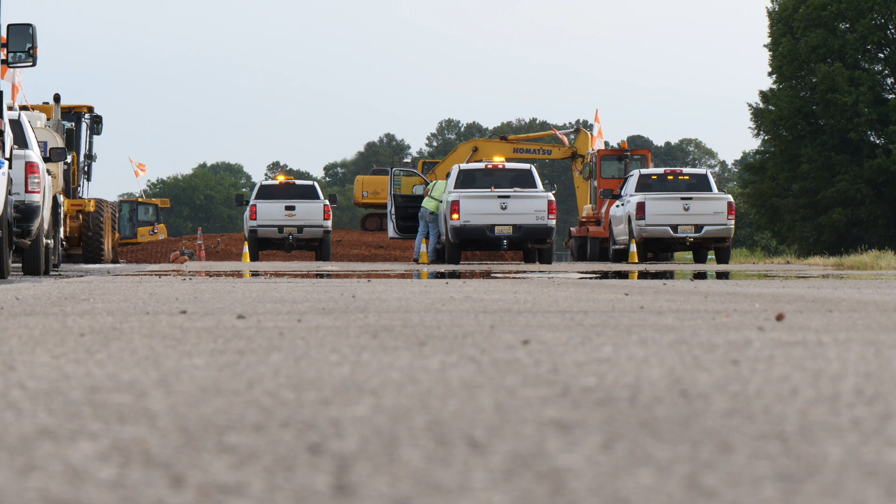Wiregrass Construction Company strives to create a culture of safety in everything we do. To accomplish this, we have established the policies in this manual. This presentation is for general safety information at Wiregrass Construction Company, giving all of our team members a reference to

items we feel are important to everyone. By no means is this an all-encompassing list of every safety practice, but it is a compilation of topics that we encounter regularly in the construction business. For specific instructions or more detailed information, please refer to your manual.

Every employee has a duty to one another to be on the lookout for unsafe work habits, conditions or equipment. Failure to address an apparent unsafe condition could lead to injury to one or more members of the team. If you see a better or safer way to do a task, it is incumbent on you to pass this suggestion on to your supervisor.

Safety must be achieved at a personal level. It is a condition of your employment that you work safely. We made you a member of our team because we value your contribution to our company. We need every team member healthy and operating at 100% to compete and succeed in our industry. Beyond that, we want all of our workers to return home to their families every day in the same condition as when they left in the morning.

Wiregrass Construction Company has a zero accidents philosophy and is committed to ensuring safe and efficient work execution, protection of our environment, as well as the safety and welfare of our employees, the public and the communities we work in.

No employee should undertake a job that appears to be unsafe. No employee should use chemicals without fully understanding their toxic properties and without the knowledge required to work with them safely. Mechanical safeguards must always be put in place and be kept in place.

Personal protective equipment must be used when and where required, and be properly maintained. Employees are to report to a superior or designated individual all unsafe conditions encountered during work. Any work-related incidents, injuries or illnesses, however slight, must be reported to an immediate supervisor at once.

Keep your mind on your work at all times. Horseplay is not permitted on the job. The result may be injury, termination or both. Do not distract fellow workers. Do not engage in any act that endangers another employee.

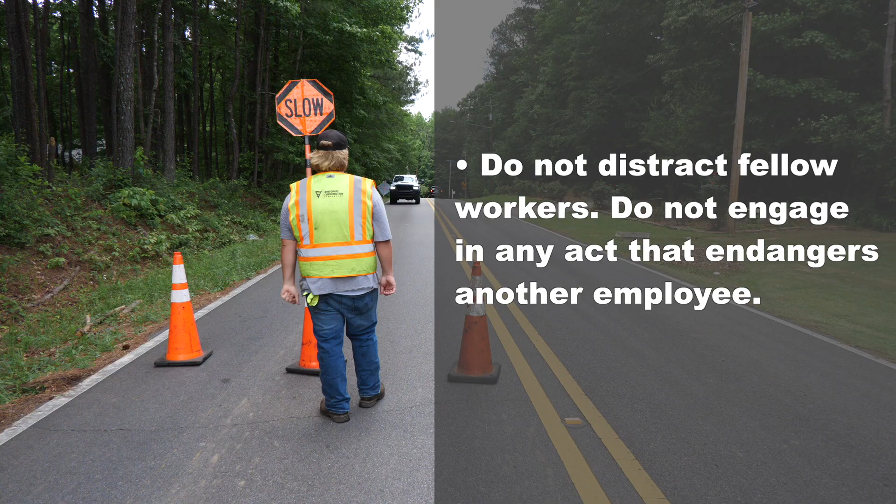Avoid leaving an unattended machine running unless it is fully guarded and intended to operate continuously in a safe mode. Riding on any material handling equipment not equipped with a seat and seatbelt for each rider is prohibited and is grounds for disciplinary action. When working around equipment, make sure the operator is aware of your position.

Do not enter any barricaded area unless you are authorized to do so. Help keep the job site clean and orderly. Use the right tools and equipment for the job. Lift correctly with your legs, not your back. Get help if the load is too heavy.

A job safety analysis is the systematic identification of potential hazards in the workplace that can be used to identify, analyze, and record: first, the steps involved in performing a specific job; next, the existing or potential safety and health hazards associated with each step; lastly, the recommended actions and procedures that will eliminate or reduce these hazards and the risk of a workplace injury or illness.

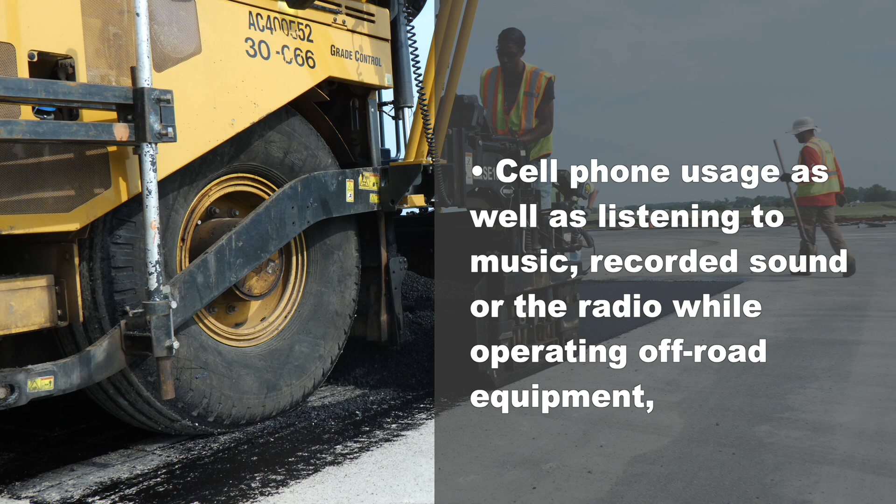Cell phone usage as well as listening to music, recorded sound or the radio while operating off-road equipment, operating licensed vehicles for construction purposes on job sites or working on a job site is prohibited.

Safety policies and work rules are developed for everyone's protection. Knowing these policies and rules is a condition of employment, as is compliance with them. Failure to do so may result in disciplinary action, up to and including termination.

Stop work policy. As a Wiregrass Construction Company representative, you have the responsibility and authority, without the fear of reprimand or retaliation, to immediately stop, question and help rectify any work activity that presents an unaddressed hazard to you, your coworkers, our clients, the public or the environment.

If you do not feel the unaddressed hazard is resolved adequately, you have the responsibility to raise it to a higher level. Minor first aid treatment.

Each employee needs to inform his or her supervisor of any incident. For minor injuries, participate in treatment with first aid supplies. If a first aid kit is used, each use should be indicated on the incident investigation report. Understand that access to a first aid kit is not intended to be a substitute for medical attention.

Only those employees who are currently certified in basic first aid from a nationally recognized provider shall administer first aid.

First aid kits. Every supervisor will be assigned a first aid kit that must be readily available at the worksite. The supervisor will be responsible for ensuring that supplies are within date and readily available.

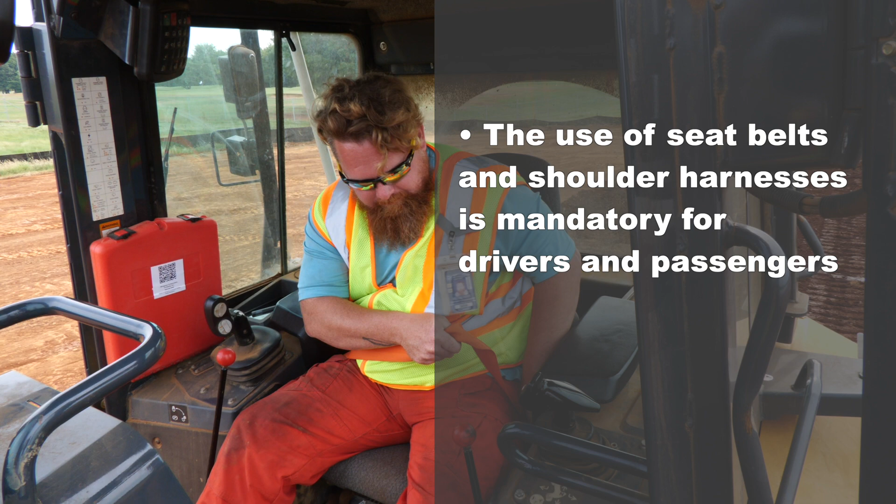The use of seat belts and shoulder harnesses is mandatory for drivers and passengers. Adhering to the manufacturer's recommendations regarding service, maintenance and inspection. Vehicles shall not be operated with any defects that would prevent safe operation.

Attention to and practice of safe driving techniques and adherence to current safety requirements. Whenever conditions permit, a vehicle should be backed into a parking space. Many accidents occur when backing out of a parking space. Restricting the use of vehicles to authorized drivers only.

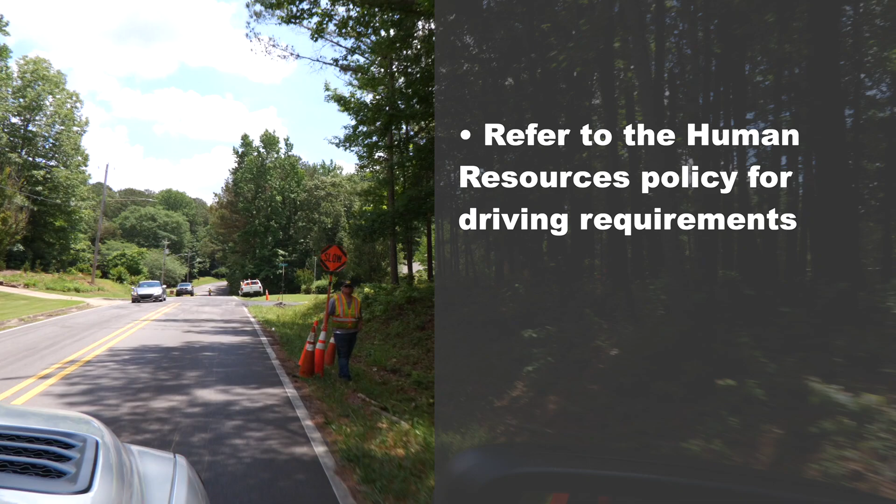Reporting the occurrence of moving violations. Accurate, comprehensive and timely reporting of all accidents by an authorized driver. Reporting theft of any company vehicle to law enforcement and your supervisor immediately. Refer to the Human Resources Policy for driving requirements. Maintain a proper level of housekeeping in and out of all vehicles.

Heat stress prevention and control. Whenever it is determined that a heat stress environment exists, heat stress preventative measures shall be implemented. Refer to heat application on your smartphone or tablet for current conditions, precautions, and for first aid and instructions.

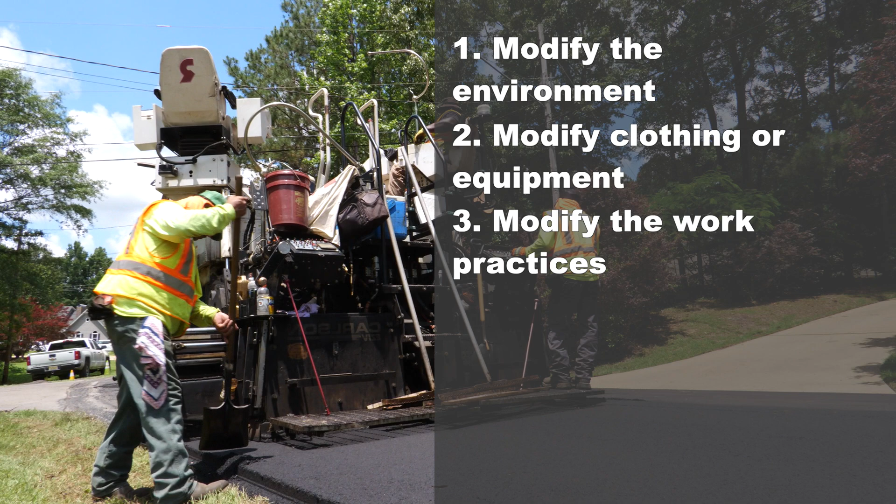When unacceptable levels of heat stress can potentially occur, there are generally five approaches to a solution: modify the environment, modify clothing or equipment, modify the work practices, modify the worker through heat acclimation, and modify production with a work-rest regimen.

Housekeeping. Recommended practice: 20-20-20. Every 20 minutes, take a 20-second scan of a 20-foot work perimeter. The work crew shall clean and organize the site and work areas regularly, not just at the end of a shift. The housekeeping program shall identify and assign responsibilities for the following.

Cleanup during a shift, day-to-day cleanup, waste disposal, removal of unused materials, and inspection to ensure cleanup is complete. Poor floor conditions are a leading cause of accidents. Clean up spilled oil and other liquids immediately. Work areas, passageways, stairways and other areas shall be kept free of debris and any unused materials.

Aisles and stairways: areas within 3 feet of the bottom and top of all ladders, stairways and other access points are to be free of any materials, equipment, cords and hoses. There shall be unobstructed access at all times to such areas as electrical panels, safety disconnect switches, fire extinguishers, emergency exits, etc.

Tools and equipment. The orderly arrangement of operations, tools, equipment and supplies is an important part of a good housekeeping program. Whether in a tool room, on the rack, in the yard or on the bench, tool housekeeping must be maintained. The site shall mark locations to provide the arrangement of tools, both in the tool room and near the workbench, to provide them with suitable fixtures.

Return tools promptly after use to reduce the chance of misplacing or losing any items. Workers shall regularly inspect, clean and repair all tools. Damaged tools shall be tagged and taken out of service immediately.

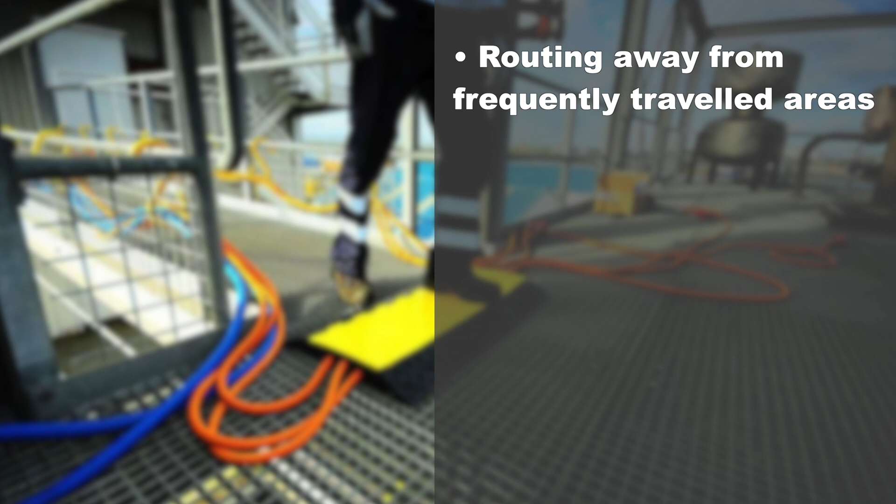Special care shall be taken in the placement of hoses, cords, welding leads and electrical and other cables. They shall be placed in a manner that will reduce the chances of being damaged by personnel, activities or equipment and to eliminate potential tripping hazards to personnel. Acceptable methods for preventing damage or eliminating tripping hazards include routing away from frequently traveled areas, burying in a trench and covering when placed in frequently traveled areas, or placing in an elevated position.

Storage. Ineffective or insufficient storage planning results in materials being handled and stored in hazardous ways. Ensure work areas are not used as storage areas by having workers move materials from work areas, as needed. Investing in extra bins and more frequent disposal may be required. The organization of stored material is essential for overcoming material storage problems, whether on a temporary or permanent basis.

Fewer strain injuries may result if the amount of handling is reduced, especially if less manual material handling is required. The location of the material shall not interfere with work, but materials should still be readily available when required.

Stack cartons and drums on a firm foundation and cross-tie them where necessary to reduce the chance of movement. Stored materials shall not obstruct aisles, stairs, exits, fire equipment, emergency eyewash fountains, emergency showers, or first aid stations. All storage areas should be clearly marked.

Flammable, combustible, toxic, and other hazardous materials shall be stored in approved containers in designated areas that are appropriate for the particular hazards they pose. Lay-down areas and yards shall be kept clean and organized. Materials shall be neatly stacked or placed. The materials shall be stacked in a secured manner to prevent toppling or spillage. Risk of impalement.

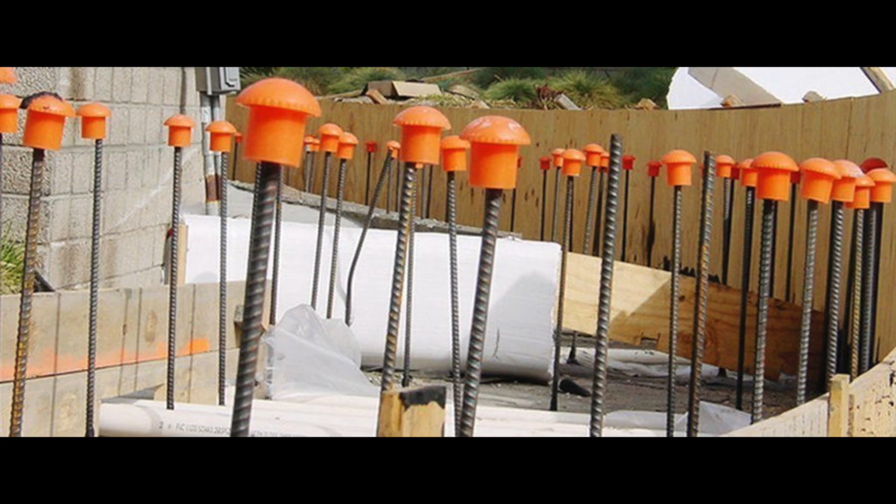Do not use the mushroom caps shown. Only rebar caps designed to provide impalement protection, such as those containing steel reinforcement, shall be used. Note: this does not eliminate the need to protect the ends of recognized vertical or horizontal impalement hazards.

Shop spill control. The best way to control spills is to stop them before they happen. Regularly clean and maintain machines and equipment in accordance with manufacturer requirements.

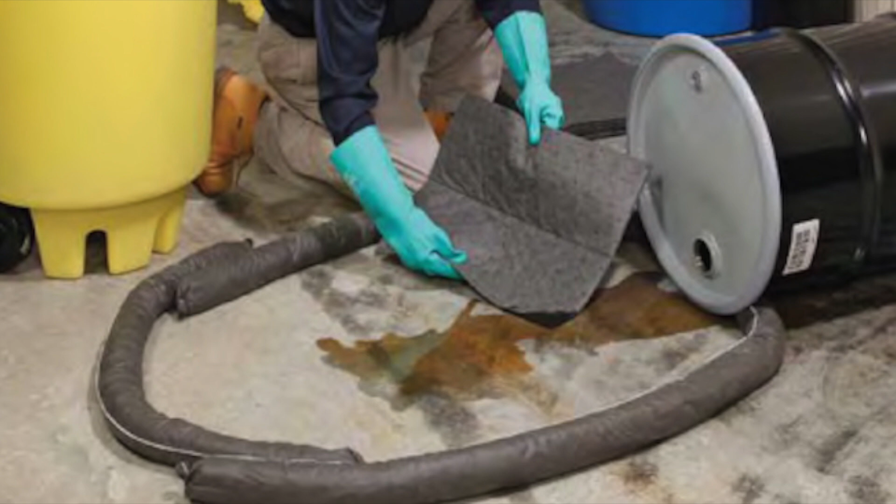Use drip pans, secondary containment, and guards where possible spills or leaks may occur. Promptly fix equipment or machines that develop a leak. Should spills or leaks occur, clean them up immediately and report the incident.

Absorbent materials are useful for wiping up greasy, oily, or other liquid spills. However, used absorbents must be disposed of in closed containers segregated from others, properly labeled, and removed from the common trash areas. Compressed air above 30 psi shall not be used for removing dust, dirt, or chips from equipment work surfaces. If compressed air is utilized, the proper PPE shall be worn.

Container labeling. Supervisors will be responsible for all containers of hazardous chemicals entering the workplace and will assure the chemical containers are properly labeled with the following: chemical name, hazard warning, name and address of the manufacturer, importer, or responsible party.

The facility where chemicals are purchased is responsible for obtaining the SDS. Current master inventory list of all SDS. The identity used on the SDS shall be the same as used on the container label.

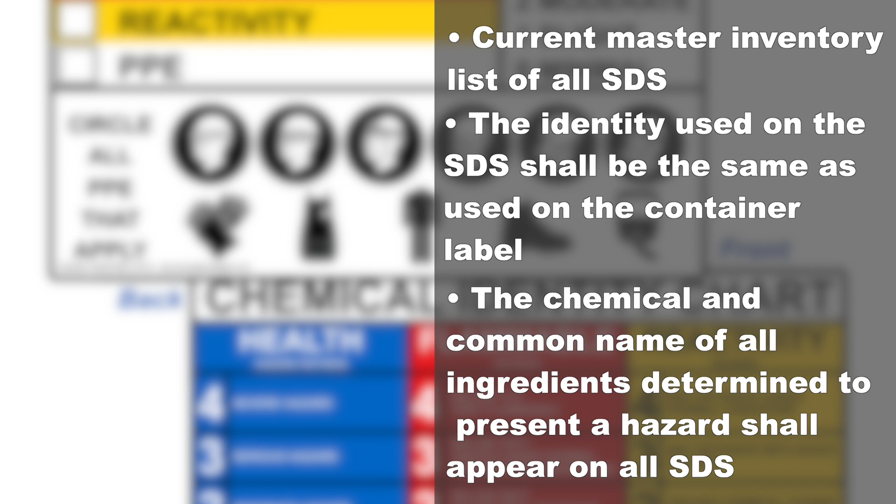The chemical and common name of all ingredients determined to present a hazard shall appear on all SDS. The physical and chemical characteristics of the substance, including vapor pressure, flash point, etc. The fire, explosion, and reactivity hazards of the chemical mixture, including the boiling point, flash point, and auto ignition temperature.

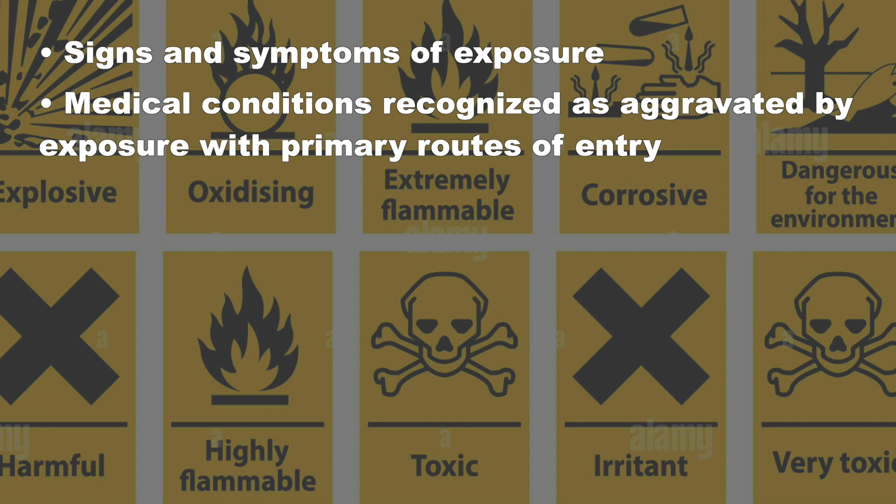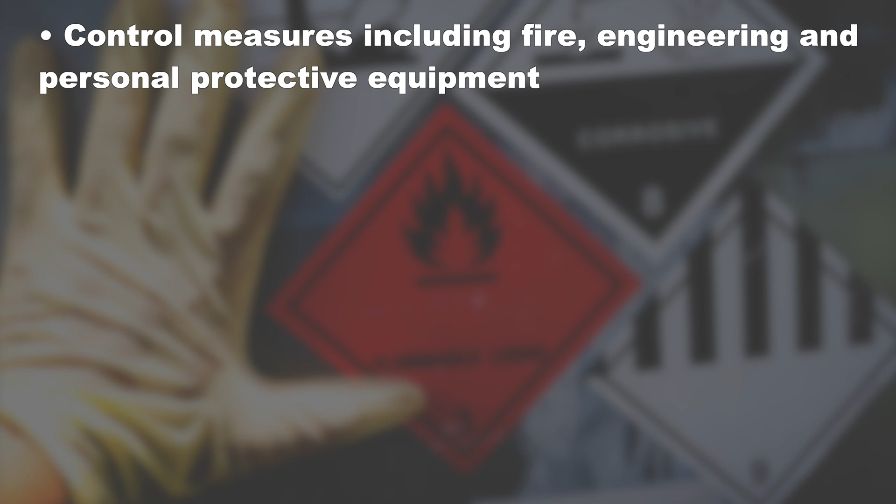Health hazards of the chemical mixture, including signs and symptoms of exposure, medical conditions recognized as aggravated by exposure with primary routes of entry, permissible exposure limit (PEL) or any other exposure limit used or recommended by the manufacturer, importer, or employer. Whether or not a substance has a carcinogen listing, NTP, or has been found to be a potential carcinogen, IARC, by OSHA. Control measures including fire, engineering, and personal protective equipment.

General precautions for safe handling and use, including protective measures during repair and maintenance procedures for cleanup of spills and leaks. Emergency and first aid procedures. Date prepared or changed. Name, address and telephone numbers of the manufacturer, importer or responsible party to call in an emergency.

Before starting work, the supervisor of a new employee will go over their copy of the Hazard Communication Program, HCP, and each SDS applicable to the job via the WCC QR code to the e-binder.

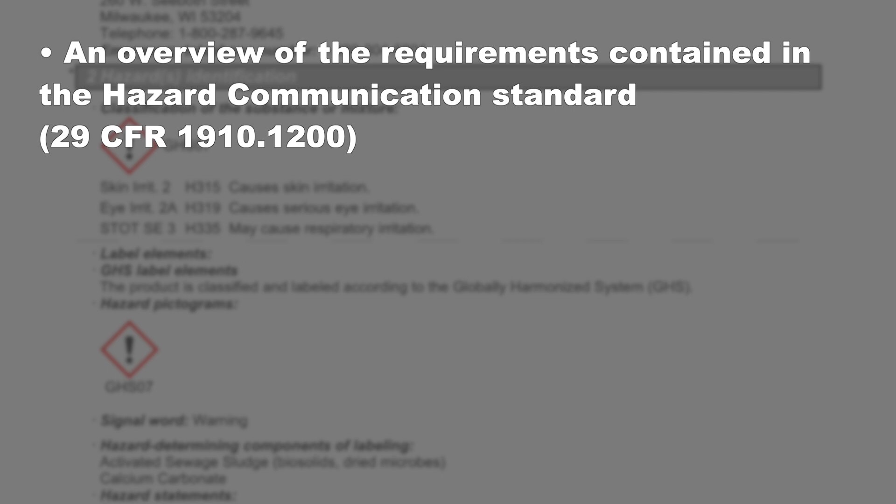The minimum orientation and training for a new employee is as follows. An overview of the requirements contained in the Hazard Communication Standard, 29 CFR 1910.1200. Chemicals present in his or her workplace. Location and availability of the written HCP. Physical and health effects of the hazardous chemicals in the workplace.

Methods and observation techniques used to determine the presence or release of hazardous chemicals in the work area. How to lessen or prevent exposure to these hazardous chemicals through proper control or work practices and PPE. Steps taken by the applicable division to lessen or prevent exposure to the chemicals listed on the inventory list. Emergency procedures to follow if exposed to any chemicals. Location of SDS file and hazardous inventory list, SDS index, or QR code.

Before any non-routine task is performed, employees shall be advised and/or they must contact the supervisor for special precautions to follow. The supervisor shall inform any other personnel who could be exposed.

Personal protective equipment, or PPE, is not to be relied upon as the only means for providing protection against hazards, but is to be used in conjunction with guards, engineering controls and sound construction practices. If possible, hazards will be abated first through engineering controls, with PPE to provide protection against hazards which cannot otherwise be reasonably abated. The supervisor will provide training for each employee who is required to use PPE.

Training will include the following: when PPE is necessary, what PPE is necessary, how to wear the assigned PPE, limitations of PPE, and the proper care, maintenance, useful life and disposal of assigned PPE.

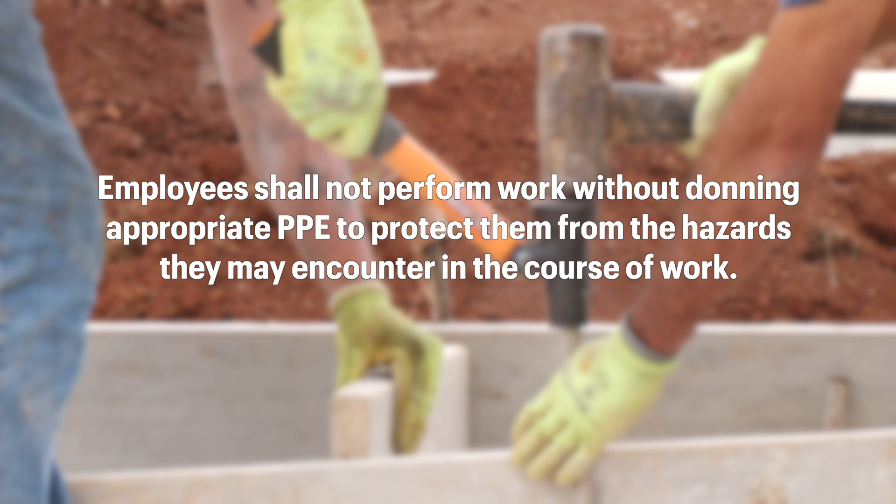Employees shall not perform work without donning appropriate PPE to protect them from the hazards they may encounter in the course of work. Shirts with minimum 4 inch sleeves and long pants are required. No tank tops, sweatpants or shorts are allowed. Loose-fitting clothes and jewelry shall not be worn around rotating machinery or operations.

Hair will be maintained beneath a hard hat or protected in a manner to avoid being caught in any equipment or operation. Hard hats: all employees working at or visiting a project must wear a hard hat at all times when required by owner, client, general contractor or company. Hard hats will also be worn in work environments where there are impact hazards from falling or flying objects, milling operations, whenever working in or around the swing radius of an excavator, or any overhead load or hazards of electrical shock.

Company-furnished hard hats shall be taken care of and properly worn without modifications, for instance painted, holes drilled in them, placement of excessive stickers, etc., and returned at the end of your employment. Supervisors and managers are responsible for ensuring that their employees are in compliance with this policy. Failure to do so can result in disciplinary action up to and including termination.

Eye and face protection: eye protection will be worn when required by the owner, client or general contractor and within any area where work is being performed that may result in flying debris, milling operations, dust, etc. Furthermore, additional welding hoods, chemical goggles, face shields, etc. shall be required.

Hearing protection. Gloves. Protective footwear. Life jackets. Reflective vest. Personal fall protection equipment.

Use all fall protection equipment for its intended purpose only. Using a lanyard or any other fall protection device for rope or any other application other than its intended use is strictly prohibited. Do not wrap a lanyard around an object and then clip it back to itself, for instance choking the lanyard, unless it is designed to be used in this application by the manufacturer. Otherwise, manufacturer recommendations strictly prohibit this practice.

If there is nothing to clip your lanyard off to, advise your supervisor and you will be issued a tie-off strap or crossarm strap that will assist in developing an approved tie-off connection point. Clipping two lanyards together, hook to hook, is prohibited. The hooks were not designed for this use and using the lanyards in this manner is forbidden.

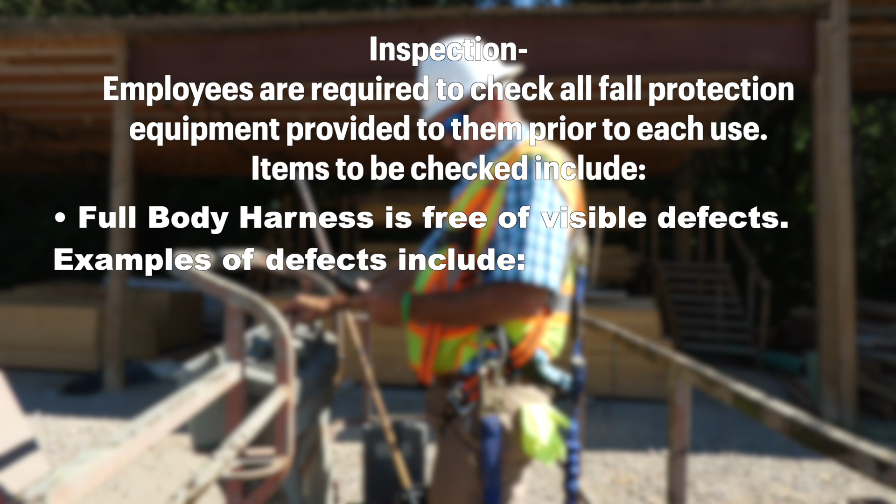Inspection: employees are required to check all fall protection equipment provided to them prior to each use. Items to be checked include: full body harness is free of visible defects. Examples of defects include significant burns to the webbing material, cracks, burns or bends in any of the metal components, painted metal components, bent buckles or tongue rivets on the belt and or leg straps.

Harness has manufacturer identification label attached and it is legible. Lanyard double locking snap hooks are operating properly and freely. Shock absorbing components have no burns, cuts or excessive fraying. Anchorage points are capable of supporting 5,000 pounds.

If your personal fall protection harness and or equipment has any of these defects, or if it does not properly fit you, discontinue the use of it immediately and notify your supervisor or safety representative. The necessary corrective actions will be taken.

Care: store equipment separately, in a cool and dry place, not subjected to direct sunlight and away from tools and sharp objects to prevent other damage. Harnesses should be kept off the floors and away from exposure to chemicals that degrade synthetics. Ideally, body harnesses and lanyards should be stored on a hook or hanger.

Repair and replacement: when a harness or other fall protection item becomes worn or damaged, or is suspected to be damaged, and or has been involved in arresting a fall, it shall be taken out of service and immediately returned to the employee's supervisor for replacement.

Cleaning and maintenance: cleaning is particularly important for the eye and face, respiratory and hearing protection equipment, as improper cleaning can impair the effectiveness of these devices.

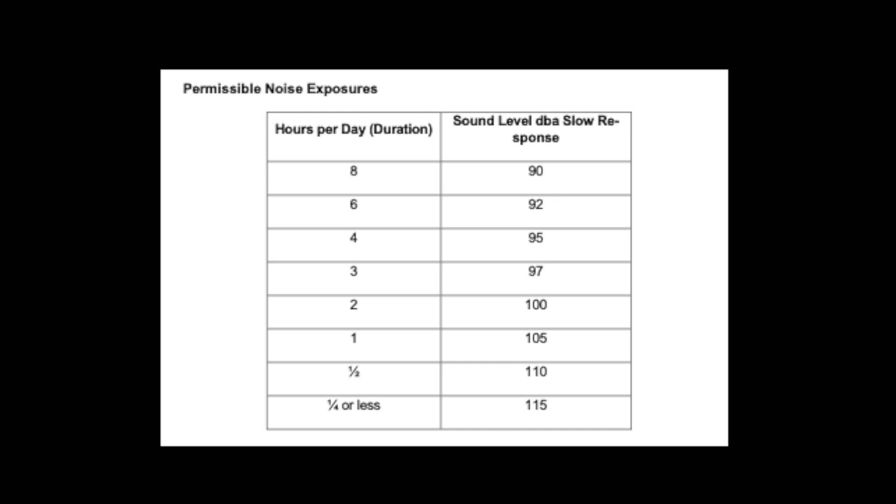Good protection depends on a good seal between the surface of the skin and the surface of the ear protection. A very small leak can destroy the effectiveness of the protection. Hearing protection has a tendency to work loose as a result of talking, chewing, etc., and it must be reseated from time to time during the workday. A good seal often cannot be obtained without some initial discomfort.

There will be no adverse reactions as a result of the use of hearing protection if it is kept reasonably clean. Personal hearing protection will be furnished to employees at no cost. If hearing protection is damaged in any way, contact the safety director for a replacement. The employee is responsible for all PPE issued. Lost or stolen PPE must be replaced by the employee.

Proper manual lifting techniques: never attempt to lift an object that is too heavy for you. Ask for help or use the equipment provided. In the plant or maintenance shop areas, use approved hand trucks, dollies and other equipment to move heavy and or awkward loads. Never try to lift an item or box you cannot comfortably lift. Get help lifting clumsy loads or those too heavy to lift safely.

Make sure you can see over any materials you are carrying. Make sure your path is clear of any obstacles. Do not walk on wet or slippery surfaces. Clean up spills immediately. All employees should know the proper way to manually lift objects.

The potential for back injury is high when manually lifting. No employee should attempt to lift a load that is too heavy. Ask a coworker for assistance or use a device such as a hand truck.

Proper lifting steps: there is a widely recognized correct way to lift. Use the legs when lifting objects, not the back muscles. Keep your back straight. Without the proper technique, a seemingly simple lift may result in injury such as pulled muscles, hernias, or painful back problems or injury. Always follow these 7 basic steps when lifting.

Spread your feet. Place one foot alongside the object to be lifted and the other behind it. Spreading your feet gives you greater stability. Now your rear foot is in position for the upward push needed for the lift.

Keep your back straight. Bend at the hips and knees. Squat into a sit-down position, keeping your back as straight as possible. Straight means your spine, back muscles and body are in proper alignment for lifting safely.

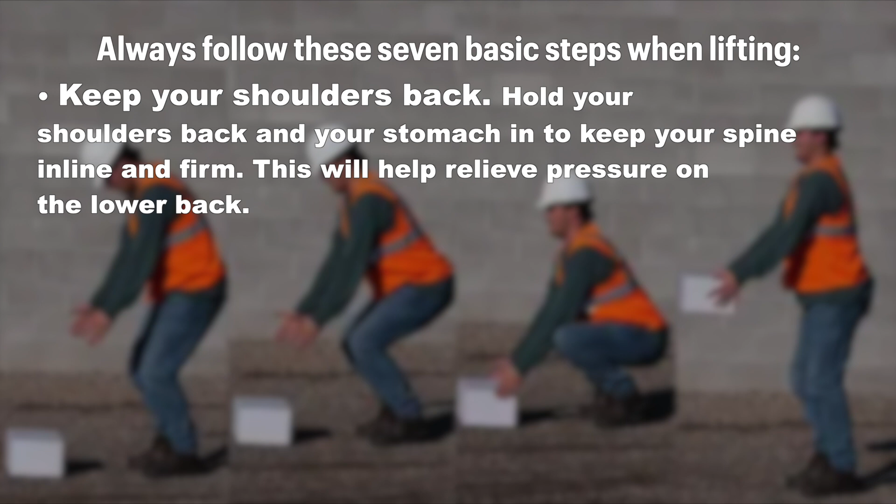Keep your shoulders back. Hold your shoulders back and your stomach in to keep your spine in line and firm. This will help relieve pressure on the lower back.

Be sure you can lift the load. Extend your fingers and hands around the object to be lifted. Use your full palm. Your fingers have very little power on their own, so use the strength of your entire hand for the lift. Tip the load on its side to test its weight and determine if you can carry it comfortably.

Tuck in your arms and elbows. Draw the load in close and tuck your arms and elbows close to the side of your body. Your arms lose much of their strength by holding them away from the body. Holding the load close to the body is the key to safe lifting.

Center your body weight. Position your body so that your weight is centered between your feet. This will ensure better balance and a stable lift.

Begin your lift with a push off your rear foot. Turn your forward foot outward, pointing it in the direction you plan to go. Turn your whole body to avoid twisting during your lift. Twisting is one of the most common causes of back stress.

Putting down the load: keep your back straight, avoid twisting your body. Squat down, bending at the knees. Set down the load and carefully release it.

Additional lifting tips and review: use hand protection, gloves, if necessary. Check the load for rough strapping, sharp edges, splinters and exposed nails. Move your feet to turn your whole body. Do not twist your upper body at the waist. Ask for assistance or use mechanical assistance if the load weight is beyond your capabilities.

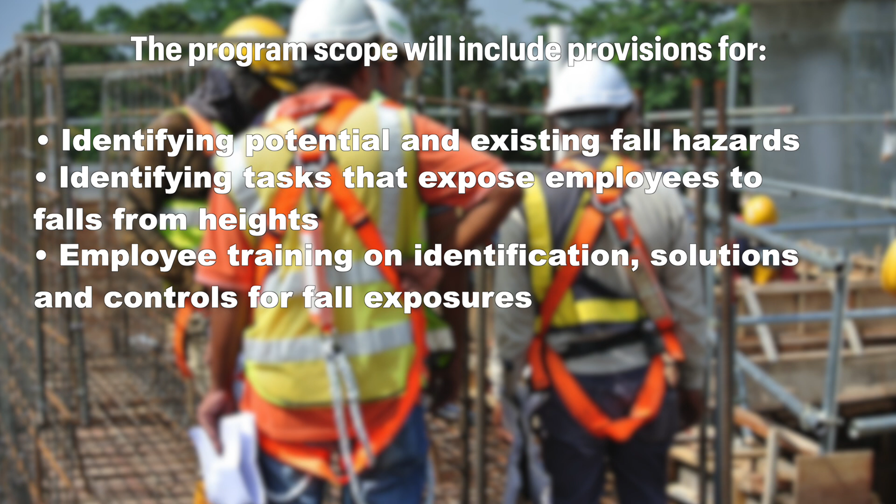The program scope will include provisions for identifying potential and existing fall hazards, identifying tasks that expose employees to falls from heights, employee training on identification, solutions and controls for fall exposures, employee training on the application and use of personal fall arrest systems, understanding what is expected of each employee, and training in record keeping.

It is the policy of Wiregrass Construction Company that all employees working in construction environments will be protected from falls of 4 feet in general industry, or 6 feet in construction, or greater in height, and have the knowledge to identify fall exposures, hazards, and understand applicable controls. All projects will have a hazard assessment completed. No work will be performed until fall risks are controlled.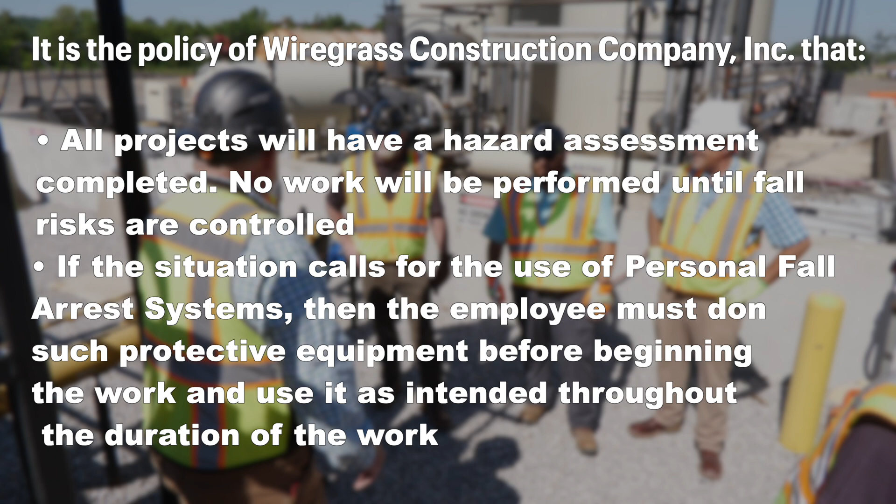If the situation calls for the use of personal fall arrest systems, then the employee must don such protective equipment before beginning the work and use it as intended throughout the duration of the work. Only employees trained in such work are expected to perform it. All places of employment and job sites shall be kept clean and orderly, and in sanitary condition.

Fall protection controls: guardrail systems. Guardrail systems used by Wiregrass Construction Company will meet the following criteria. Top rails and mid rails of guardrail systems must be at least 1/4 inch in nominal diameter. When wire rope is used for top rails, it will be flagged at no more than 6-foot intervals with high visibility materials. Steel and plastic banding will not be used as top rails or mid rails.

Top rails will be between 39 and 45 inches high and able to withstand 200 pounds of pressure in any direction. Mid rails will be above 21 inches high with intermediate openings no greater than 19 inches, with mid rails having a minimum 150 pounds resistance capacity.

Toe boards must be erected along the edges of the overhead working surface for a distance sufficient to protect persons working below. Toe boards shall be capable of withstanding a force of at least 50 pounds applied in any direction at any point along the toe board.

Toe boards shall be a minimum of 3.5 inches tall from their top edge to the level of the working surface, having no more than 1/4 of an inch clearance above the working surface, and be solid or have an opening no larger than 1 inch in size.

Where tools, equipment or materials are piled higher than the top edge of a toe board, paneling or screening must be erected from the working surface or toe board to the top of a guardrail system's top rail or mid rail, for a distance sufficient to protect employees below. If guardrails must be removed to receive materials, alternative fall protections such as personal fall arrest systems will be established.

Hole covers. Hole covers subject to vehicle or equipment traffic must be able to support at least twice the maximum axle load of the largest vehicle to which the cover might be subjected. All other covers must be able to support at least twice the weight of employees, equipment and materials that may be imposed on the cover at any time.

To prevent accidental displacement resulting from wind, equipment, or coworkers' activities, all covers must be secured. All covers shall be color-coded or bear the markings, hole, or cover.

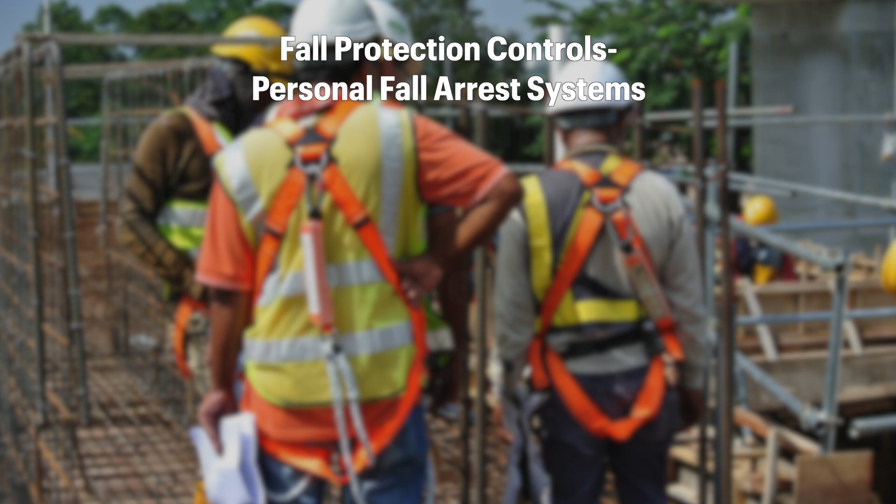Personal fall arrest systems. Where fall risks have been identified and a personal fall arrest system is determined to be necessary, the following criteria will be met. All personal fall arrest system use must be reviewed and approved by a competent person.

Equipment: body belts are not permitted. Only full body harnesses will be used. All components used in a fall arrest system shall be compatible with one another. All components will be inspected prior to each use for wear, damage, or deterioration.

Personal fall arrest systems subjected to impact loading shall be taken out of service immediately and not used again until recertified for use by the manufacturer.

Snap hooks may not be connected as follows unless they are the locking type and are designed for this type of installation: directly to webbing, rope, or wire; to each other; to a D-ring to which another snap hook or other connector is attached; or to any object that is incompatibly shaped or dimensioned in relation to the snap hook, such that unintentional disengagement could occur by the connected object being able to depress the snap hook keeper and release itself.

Anchor points. Personal fall arrest systems shall be attached to anchorage points approved by the site's competent person. The anchor point must be capable of supporting a minimum tensile strength of 5,000 pounds per employee connected. Anyone working at a height must be within verbal range of another person who could raise an alarm should a fall occur.

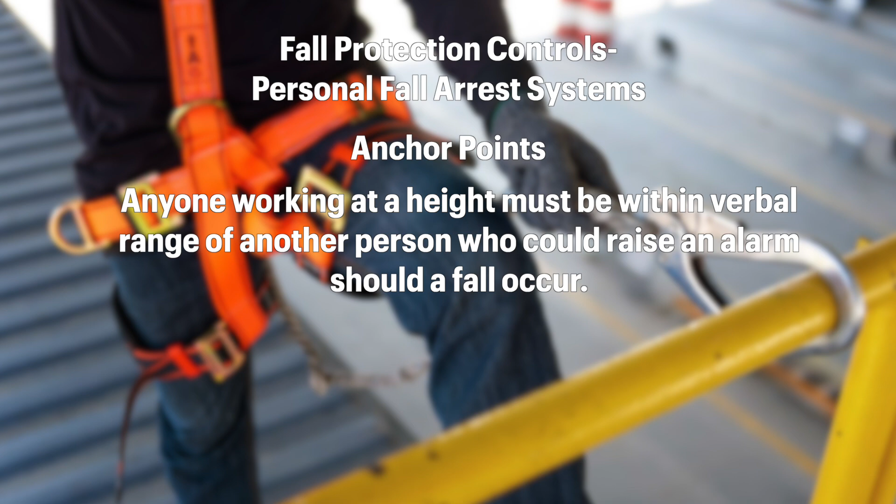Ladders. Ladders purchased shall be vendor certified as ANSI Type IA. Two or more people shall not work from the same ladder unless it is specifically designed for two people. Special pre-task planning should be conducted before employees use a two-person stepladder.

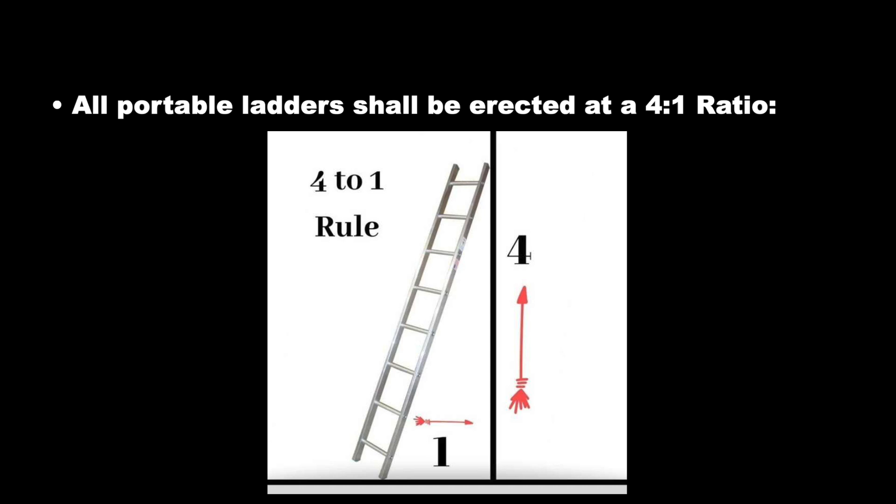A half inch rope shall be spliced to the top, back rung of stepladders, or to the third rung from the top of straight and extension ladders to provide a means for ladder tie-off. All portable ladders shall be erected at a 4:1 ratio. For every 4 feet of extension, the base shall be 1 foot out.

Ladder specifications. Ladders shall be constructed of wood or fiberglass. Straight ladders shall not be longer than 20 feet, extension ladders shall not be longer than 36 feet. All straight and extension ladders shall have non-slip feet. Stepladders and platform ladders shall not be longer than 12 feet as determined by the front rail.

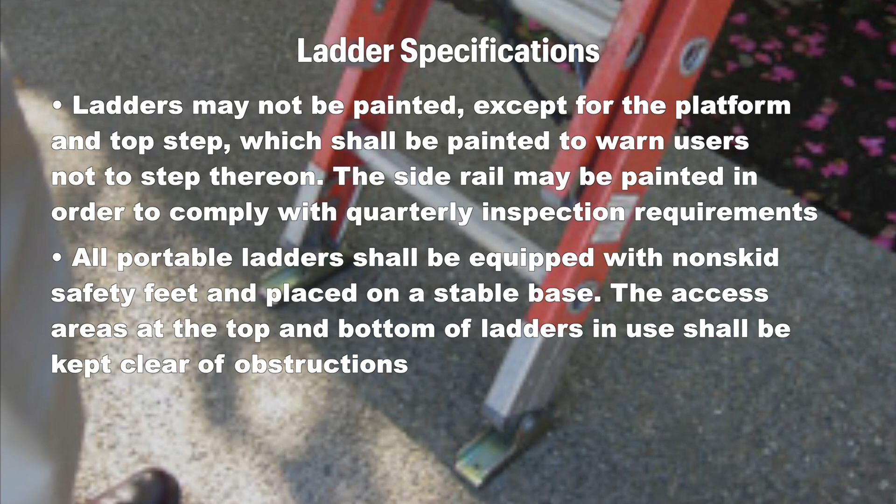Ladders may not be painted, except for the platform and top step, which shall be painted to warn users not to step thereon. The side rail may be painted in order to comply with quarterly inspection requirements. All portable ladders shall be equipped with non-skid safety feet and placed on a stable base. The access areas at the top and bottom of ladders in use shall be kept clear of obstructions.

Safe use of ladders. Ladders shall be placed with secure footing, or they shall be lashed or held in position. The side rails of all ladders shall extend 36 inches above the landing. When this is not practical, grab rails shall be installed. All ladders in use shall be tied, blocked or otherwise secured to prevent displacement.

The foot of a ladder shall, where possible, be used at such a pitch that the horizontal distance from the top support to the foot of the ladder is one-quarter of the working length of the ladder: the length along the ladder between the foot and the support. Employees shall always face the ladder when climbing up or down, and shall maintain 3 points of contact.

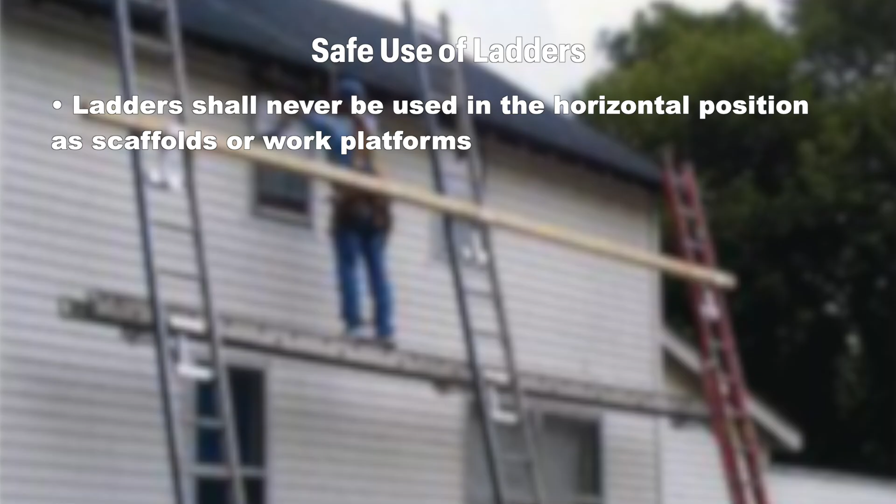Short ladders shall not be spliced together to make longer ladders. Ladders shall never be used in the horizontal position as scaffolds or work platforms. The top of a regular stepladder shall not be used as a step.

Both hands shall be used when climbing and descending ladders. Carrying tools while climbing or descending ladders is prohibited. To help reduce the possibility, a rope should be secured near any ladder to serve as access to overhead work areas.

Inspecting ladders. Personnel who use ladders are responsible and expected to inspect ladders before use. Bends, dents, cracks, loose or missing rivets, disconnected braces and corrosion can seriously weaken a ladder. The area around rivet points on fiberglass ladders shall be carefully inspected for hairline stress cracks.

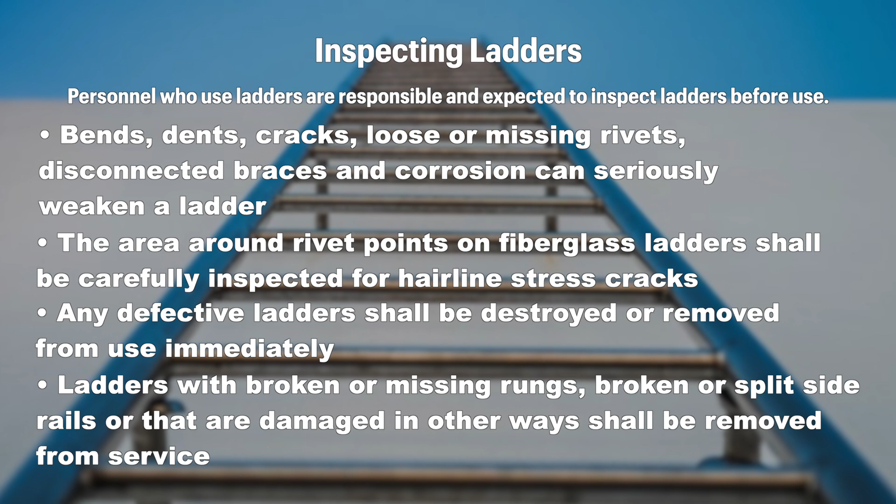Any defective ladders shall be destroyed or removed from use immediately. Ladders with broken or missing rungs, broken or split side rails, or that are damaged in other ways shall be removed from service.

Storing and transporting ladders. When not in use, ladders shall be stored on racks in locations protected from the elements, with good ventilation, away from excessive heat. Materials are not to be stored on ladders.

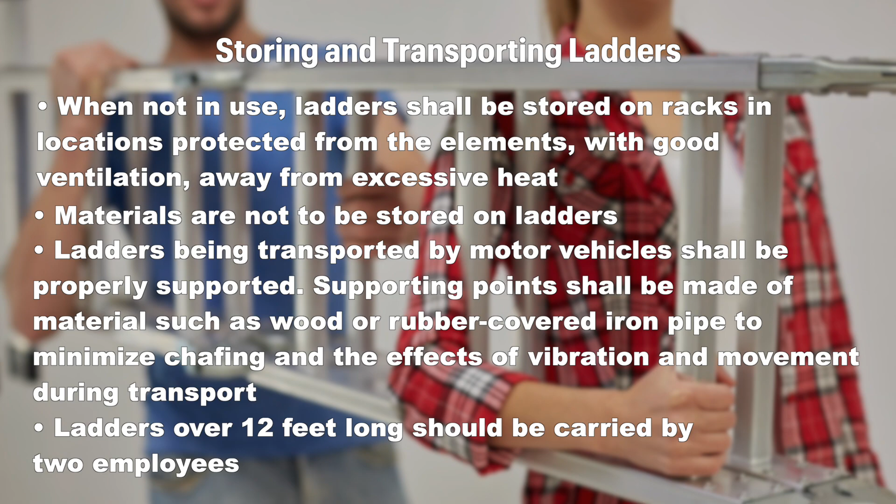Ladders being transported by motor vehicles shall be properly supported. Supporting points shall be made of material such as wood or rubber-covered iron pipe to minimize chafing and the effects of vibration and movement during transport. Ladders over 12 feet long should be carried by two employees. Job-made ladders are not allowed on Wiregrass Construction Company sites or projects.

Fire protection. The Wiregrass Construction Company fire protection program consists of the following: provisions for separate storage for flammable materials, provisions for storage or dispensing flammable liquids to meet regulatory requirements, and employee training in the proper use of fire extinguishers.

Fire extinguishers provided and available with current certifications. Clear access provided for firefighting equipment to all areas of the project. Appropriate firefighting equipment shall be immediately available in the work area and shall be maintained in a state of readiness. Fire extinguishers shall be conspicuously marked and clear access to each shall be maintained.

Fire extinguishers shall be inspected, tested and maintained in accordance with National Fire Protection Association, NFPA, standards. Fire extinguishers shall be inspected monthly and annually by an outside agency. Each fire extinguisher shall be replaced immediately after discharge with another fire extinguisher that is fully charged and of the proper size and type.

Smoking shall be prohibited at or near operations which constitute a fire hazard. Only approved containers and portable tanks shall be used for the storage and handling of flammable and combustible liquids. UL FM approved metal safety cans shall be employed for the handling and use of flammable liquids. Flammable or combustible liquids shall not be stored in areas used for exits or stairways, or normally used for the safe passage of people.

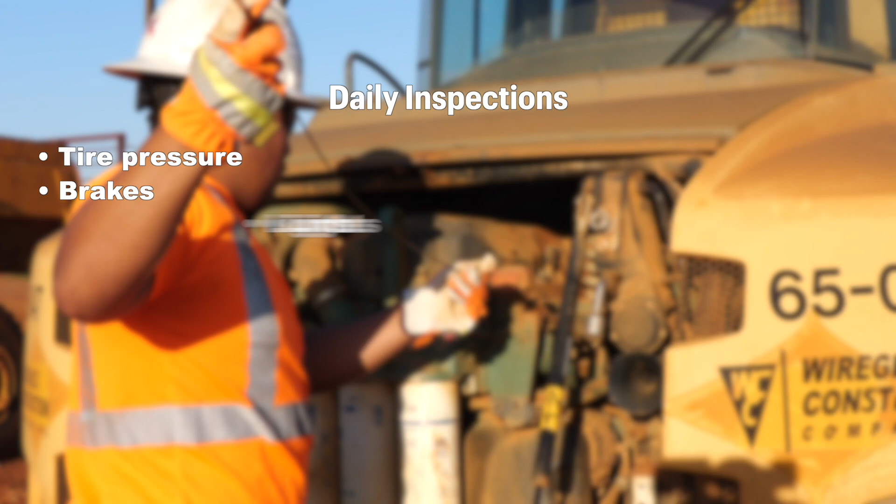At a minimum, the following systems should be checked to verify full working condition and levels: tire pressure, brakes, lights, proper placard for those carrying hazardous materials, tanks, hoses, pumps for leaking, applicable DOT markings, fire extinguisher charge level, windshield, wipers, and fluid levels. In addition, continuous housekeeping of the cab areas of trucks is an important health and safety issue. Trash and debris that is present could cause or contribute to an accident.

Material moving, loading and unloading. All employees shall be fully alert and cautious when carrying out moving, loading, securing and unloading of equipment or other materials. Employees must know in advance the weight of material and the capacity of the handling device.

Lowboys hauling heavy equipment shall not be overloaded, or loads overbalanced or hauled in a dangerous manner, such as blades hanging out too far or tracks too near the edge of the trailer. Lowboy trailers shall be positioned on level ground to minimize the risk of tipping the loaded equipment.

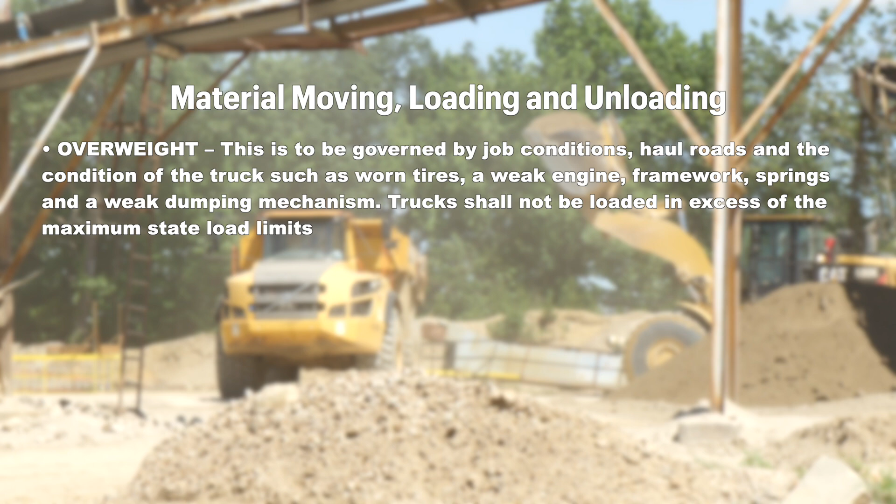For all material hauling, the driver shall check proper loading of the body before the truck leaves the loading point. Correction shall be made for overweight conditions, governed by job conditions, haul roads, and the condition of the truck, such as worn tires, a weak engine, framework, springs, and a weak dumping mechanism. Trucks shall not be loaded in excess of the maximum state load limits.

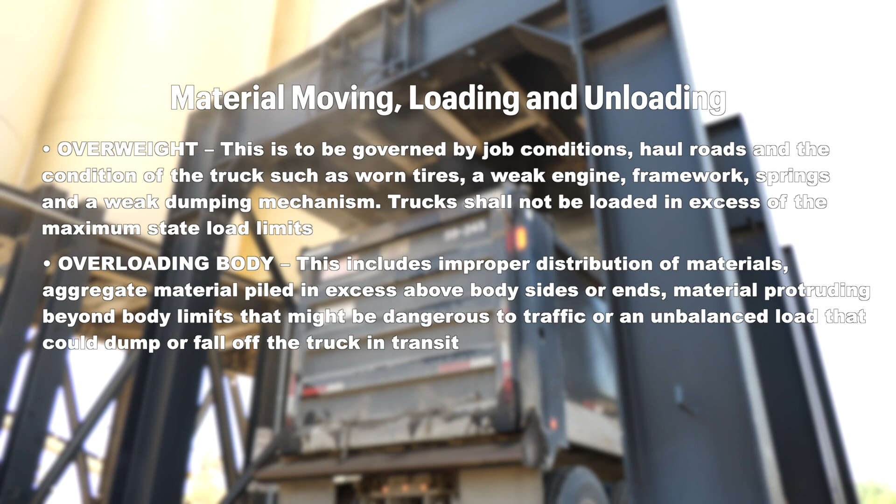Overloading the body includes improper distribution of materials, aggregate material piled in excess above body sides or ends, material protruding beyond body limits that might be dangerous to traffic, or an unbalanced load that could dump or fall off the truck in transit. Overloading the cab.

No equipment shall be operated with more than one person per seat or without operable seat belts.

General safety rules. Do not back any vehicle with an obstructed view to the rear, unless a flagman or spotter is in a position to give backing instructions. All trucks shall be equipped with a backup alarm that is audible above the surrounding noise.

At all times, be aware of equipment working close by, and the location of other employees while moving, loading and unloading. Make sure your load is properly secured with straps and binders.

You shall never drive or move any loaded vehicle on the highway if the load is not properly secured. The load must not be able to drop, shift, leak or otherwise escape.

If you notice any irregularity in the condition of the load or the tie-down equipment, stop the truck immediately and make the necessary adjustments. Discontinue driving until the problem is corrected, since load shifting or loss of cargo can present a serious safety hazard. Any driver caught with a load inadequately secured is in violation of company policy.

Disciplinary action will be taken against any employee who fails to follow proper loading and binding procedures. When traveling, stop and check the load periodically and retighten the chains if needed. Proper procedures shall be used at all times.

Hazardous materials should be loaded and stored in such a way that they will not be damaged by other freight or handling equipment.

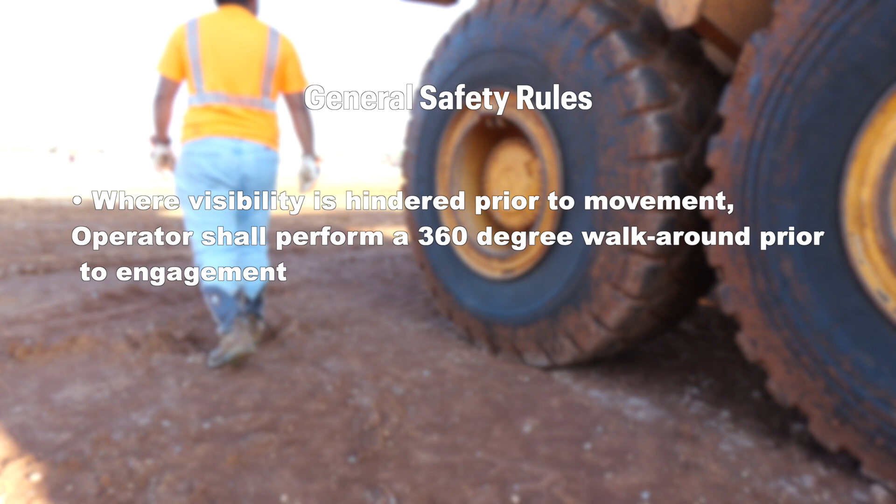Where visibility is hindered prior to movement, the operator shall perform a 360-degree walk around prior to engagement.

Mobile equipment maintenance presents a variety of dangers from stored and potentially hazardous energy. It is important to bring equipment to a zero mechanical state, in which there is no potential for accidental release of stored or potential energy and accidental startup is prevented.

Tags are required on all sources of ignition. If working on wheeled equipment, wheel chocks should be installed to prevent the equipment from rolling. If maintenance or service work requires that attachments or other components be elevated, hardwood blocks, equipment jacks, safety stops, or pivot point pins should be installed to prevent the elevated items from falling.

Work zone safety warning: OSHA compliance officers are driving around looking for work zone activities and will stop to conduct an inspection if unsafe conditions are noticed.

Work zone facts: during peak construction season, approximately 20% of our nation's highway system is under construction with more than 3,000 work zones. Approximately 12 billion vehicle miles of travel a year will be through work zones. Motorists can expect to encounter an active work zone 1 out of every 100 miles driven on the nation's highway system. More than 40,000 people are injured each year as a result of crashes in work zones.

1 work zone fatality every 8 hours, 3 per day. 1 work zone injury every 9 minutes, 160 per day.

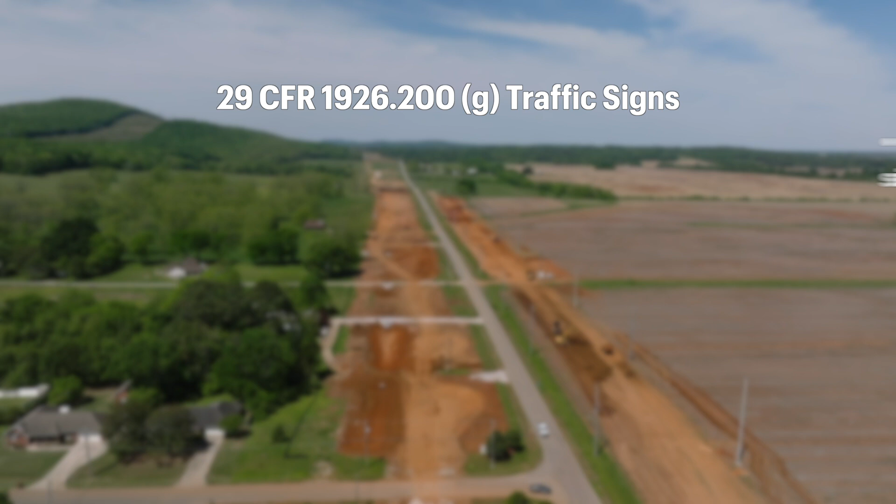29 CFR 1926.200(g), Traffic signs: construction areas shall be posted with legible traffic signs at points of hazard. All traffic control signs or devices used for protection of construction workers shall conform to Part 6 of the Manual of Uniform Traffic Control Devices, MUTCD.

29 CFR 1926.201(a), Flaggers: signaling by flaggers and the use of flaggers, including warning garments worn by flaggers, shall conform to Part 6 of the Manual of Uniform Traffic Control Devices, MUTCD.

Work zone safety standards: the MUTCD defines the standards used by road managers nationwide to install and maintain traffic control devices on streets and highways. The MUTCD is published by the Federal Highway Administration (FHWA), incorporated by the Department of Transportation (DOT), and referenced by the Occupational Safety and Health Administration (OSHA).

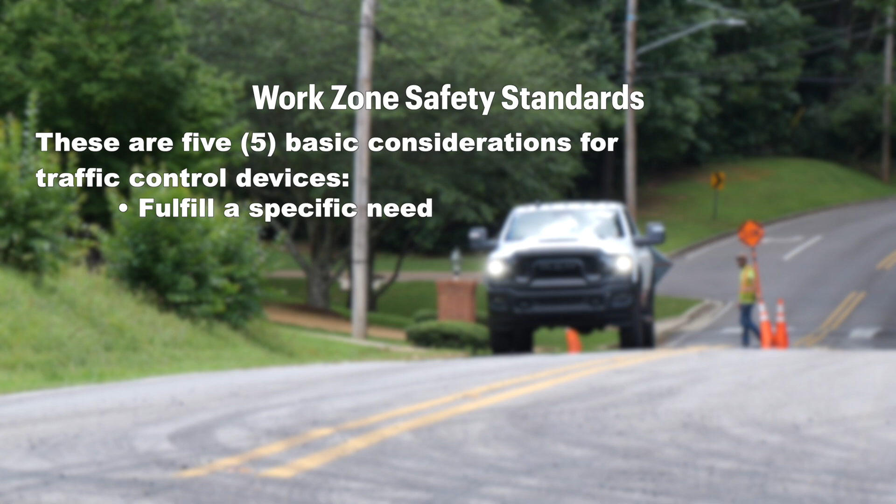These are 5 basic considerations for traffic control devices: fulfill a specific need, command attention, convey a clear and simple meaning, command respect of the road user, and give adequate time for proper response.

By following the specifications in the MUTCD, a road user will have the opportunity to be warned of and take necessary action to avoid collision in a work zone. The MUTCD assumes that road users exercise caution while driving through a work zone.

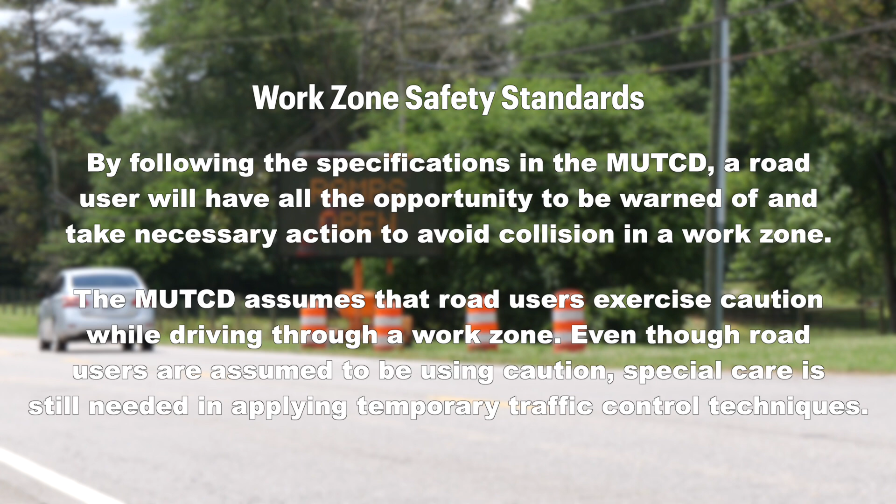Even though road users are assumed to be using caution, special care is still needed in applying temporary traffic control techniques. Follow these fundamental principles for work zone safety.

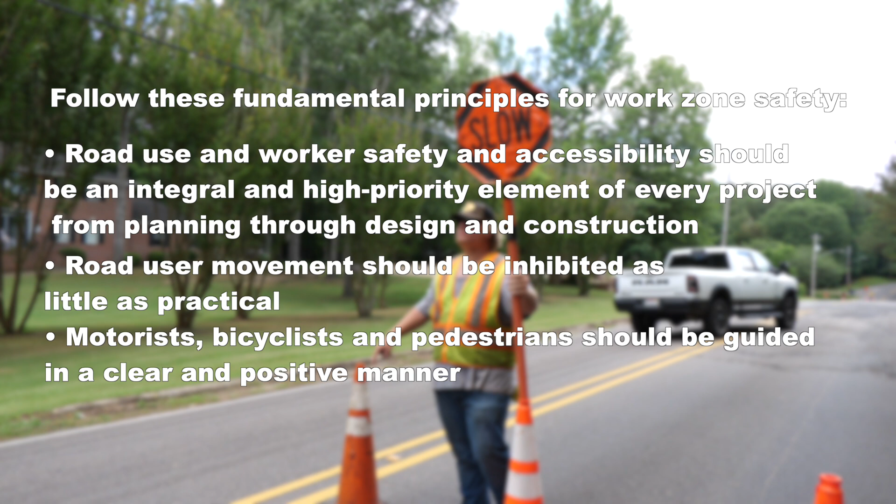Road user and worker safety and accessibility should be an integral and high-priority element of every project from planning through design and construction. Road user movement should be inhibited as little as practical. Motorists, bicyclists, and pedestrians should be guided in a clear and positive manner.

To provide acceptable levels of operations, routine day and night inspections of the work zone should be performed. Attention should be given to the maintenance of roadside safety during the life of the work zone. Good public relations should be maintained.

Warning signs used in temporary traffic control work zones have a black legend and border, as well as an orange background. Work zone safety considerations.

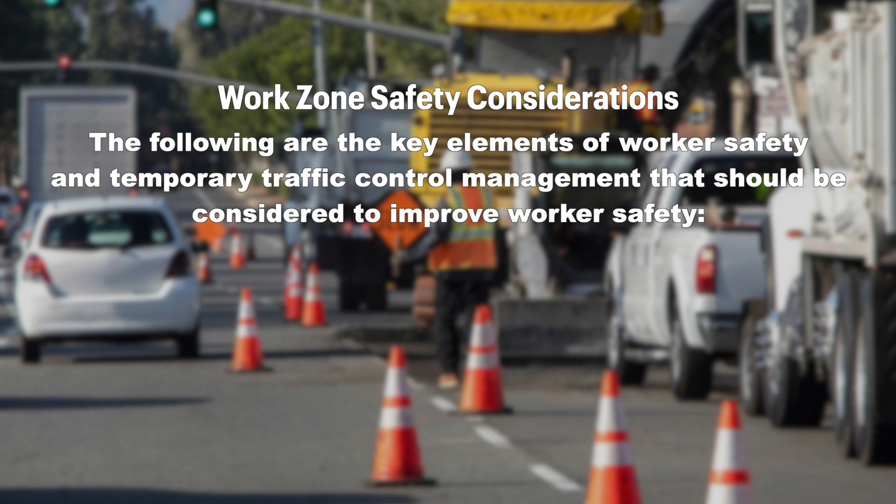The following are the key elements of worker safety and temporary traffic control management that should be considered to improve worker safety. Training: all workers should be trained on how to work next to motor vehicle traffic in a way that minimizes their vulnerability. Workers having specific responsibilities should be trained in the proper techniques, device usage, and placement.

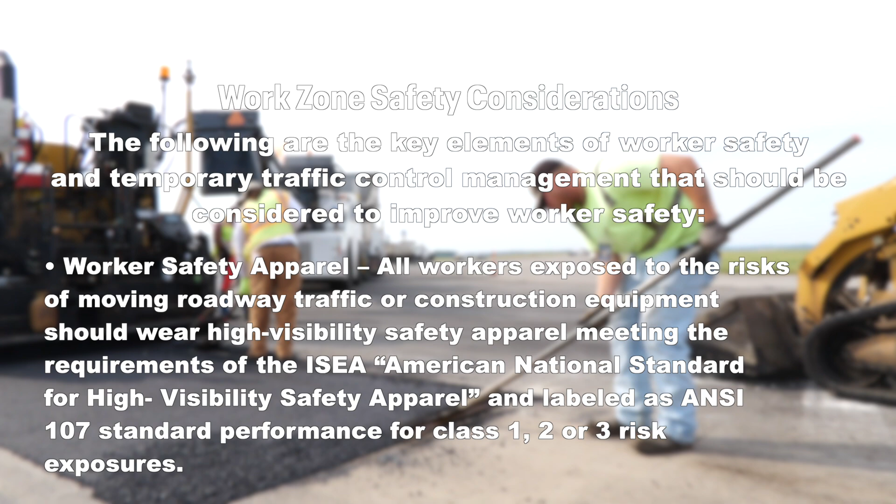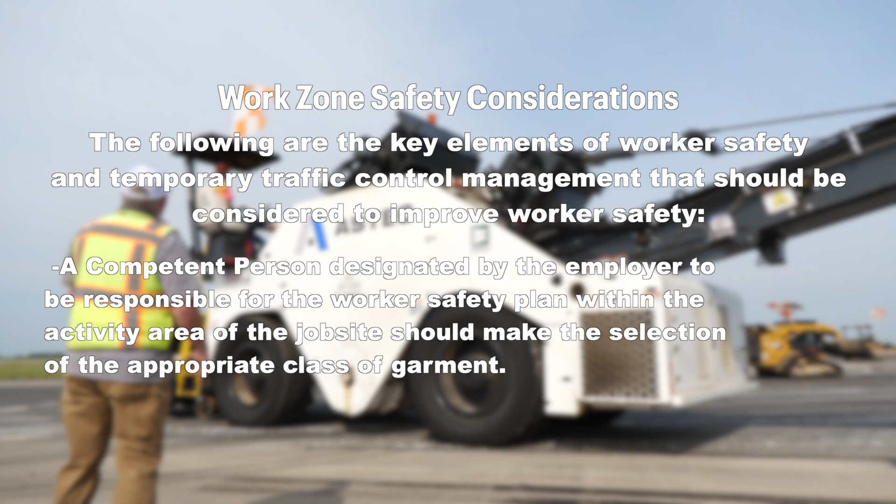Worker safety apparel: all workers exposed to the risks of moving roadway traffic or construction equipment should wear high-visibility safety apparel meeting the requirements of the ISEA American National Standard for High-Visibility Safety Apparel, labeled as ANSI 107 standard performance for Class 1, 2 or 3 risk exposures. A competent person designated by the employer to be responsible for the worker safety plan within the activity area of the job site should make the selection of the appropriate class of garment.

Temporary traffic barriers should be placed along the workspace depending on factors such as lateral clearance of workers from adjacent traffic, speed of traffic, duration and type of operations, time of day and volume of traffic.

Speed reduction: reducing the speed of vehicular traffic, mainly through regulatory speed zoning, funneling, lane reduction, or the use of uniformed law enforcement officers or flaggers, should be considered.

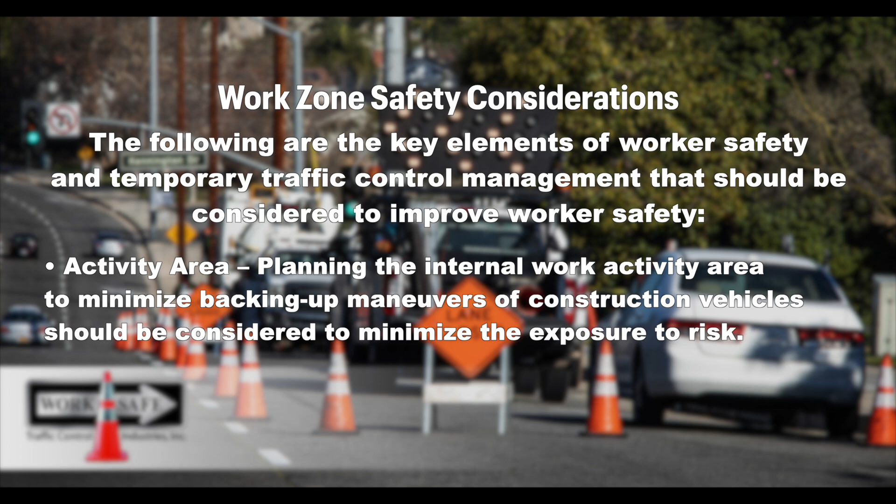Activity area planning: the internal work activity area should be designed to minimize backing up maneuvers of construction vehicles, in order to minimize the exposure to risk.

Worker safety planning: a competent person designated by the employer should conduct a basic hazard assessment for the worksite and job classifications required in the activity area. This safety professional should determine whether engineering, administrative, or personal protection measures should be implemented.

High visibility safety apparel: employees exposed to public vehicular traffic must be provided with, and must wear, warning vests or other suitable garments marked with or made of reflective or high-visibility material.

Temporary traffic control work zone, external traffic: temporary traffic control work zone components follow the requirements of the MUTCD. The advance warning area is the section where road users are informed about the upcoming work zone or incident area. It may vary from a single sign or a high-intensity rotating, flashing, oscillating, or strobe light on a vehicle, to a series of signs in advance of the work zone activity area.

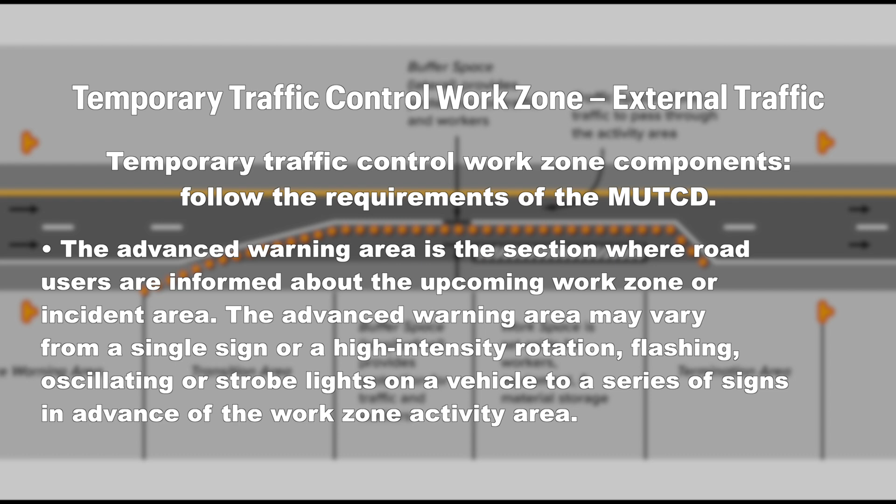The transition area is the section where road users are redirected out of their normal path, usually involving strategic use of tapers. Tapers are created by using a series of channelizing devices and/or pavement markings to move traffic out of or into the normal path. The activity area is the section where the work activity takes place.

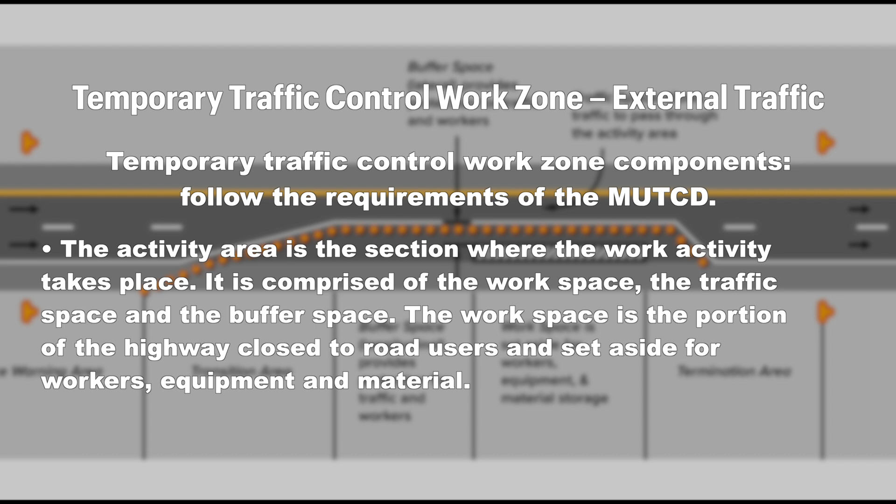The activity area is comprised of the workspace, the traffic space, and the buffer space. The workspace is the portion of the highway closed to road users and set aside for workers, equipment, and material. Workspaces are usually delineated for road users by channelizing devices, or, to exclude vehicles and pedestrians, by temporary barriers.

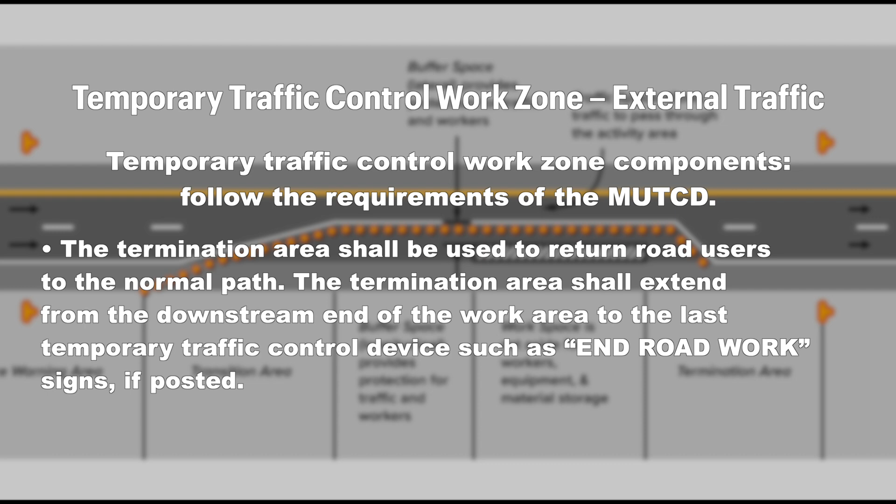Buffer spaces may be positioned either longitudinally or laterally with respect to the direction of road user flow. The termination area shall be used to return road users to the normal path, extending from the downstream end of the work area to the last temporary traffic control device, such as END ROAD WORK signs, if posted.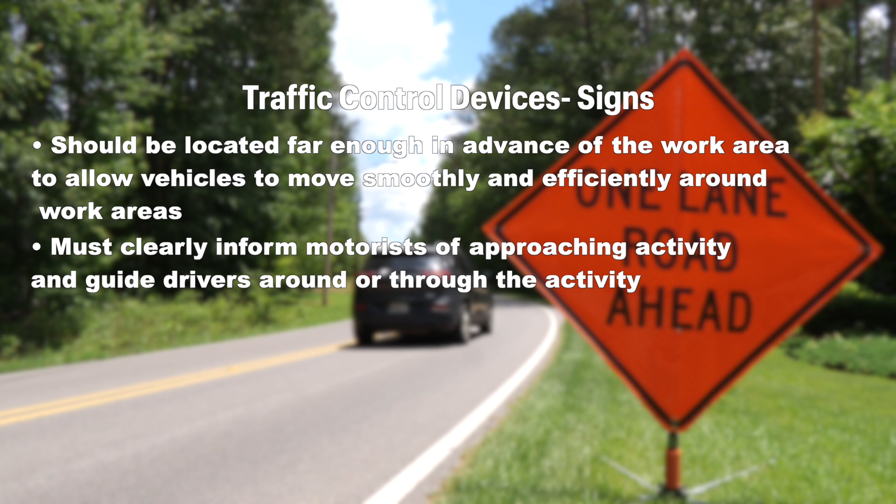Traffic control devices include all signs, signals, markings, and other devices used to regulate, warn, or guide road users. Only standardized devices and signs may be used to direct traffic through temporary work zones. Signs should be located far enough in advance of the work area to allow vehicles to move smoothly and efficiently around work areas, and must clearly inform motorists of approaching activity and guide drivers around or through the activity.

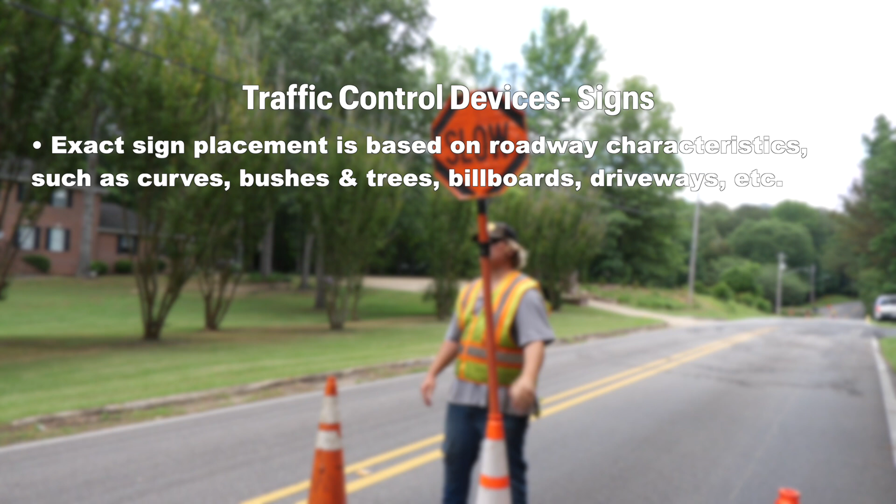All signs used at night must be retroreflective. Distance between signs is based on the suggested advance warning sign spacing established in the MUTCD. Exact sign placement is based on roadway characteristics, such as curves, bushes and trees, billboards, driveways, etc. Warning signs in temporary traffic control zones must have a black legend and a black border on an orange background.

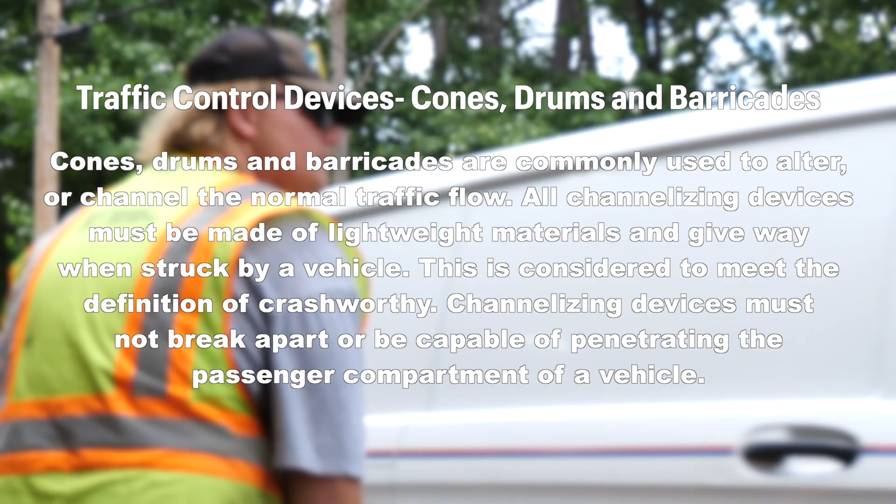Cones, drums and barricades are commonly used to alter or channel the normal traffic flow. All channelizing devices must be made of lightweight materials and give way when struck by a vehicle; this is considered to meet the definition of crashworthy. Channelizing devices must not break apart or be capable of penetrating the passenger compartment of a vehicle.

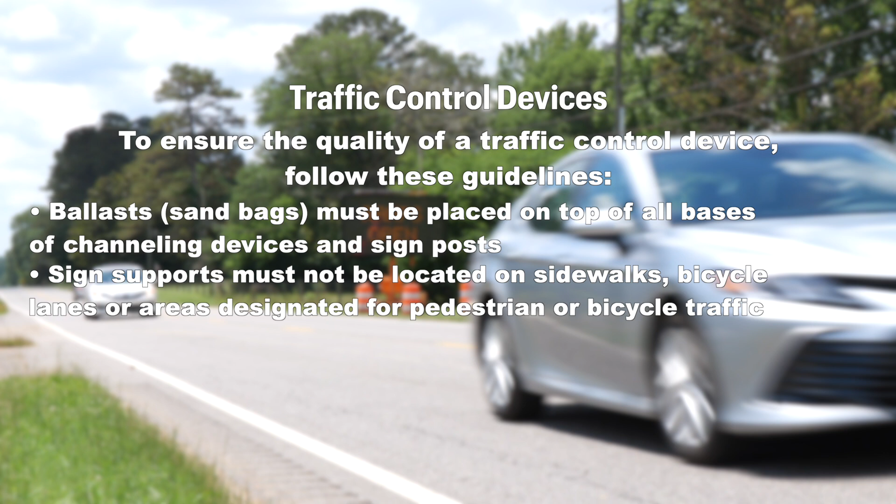Traffic control devices: to ensure the quality of a traffic control device, follow these guidelines. Ballasts, such as sandbags, must be placed on top of all bases of channelizing devices and signposts. Sign supports must not be located on sidewalks, bicycle lanes, or areas designated for pedestrian or bicycle traffic. Do not modify, distort, or change the design or function of any traffic control device. Devices that are damaged or have lost a significant amount of their retroreflectivity and effectiveness must be replaced.

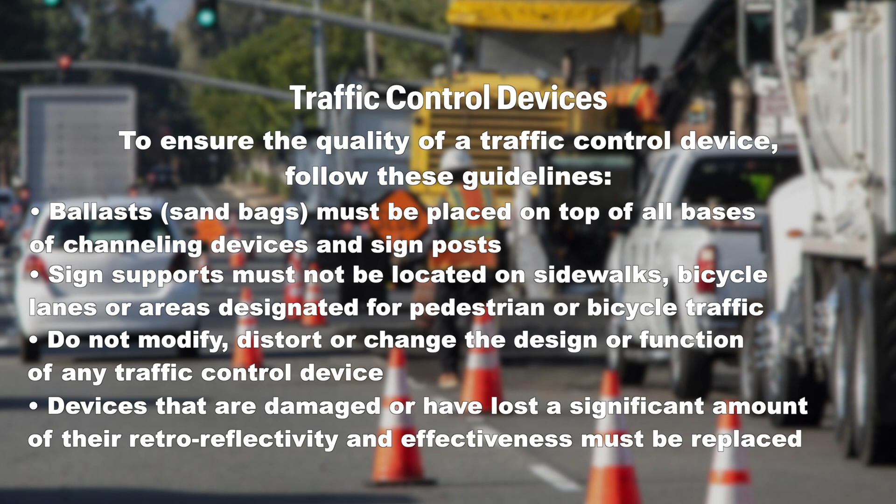Flagger qualifications: because flaggers are responsible for public safety and make the greatest number of contacts with the public of all highway workers, they should be trained in safe traffic control practices and public contact techniques. Flaggers should be able to satisfactorily demonstrate the following abilities.

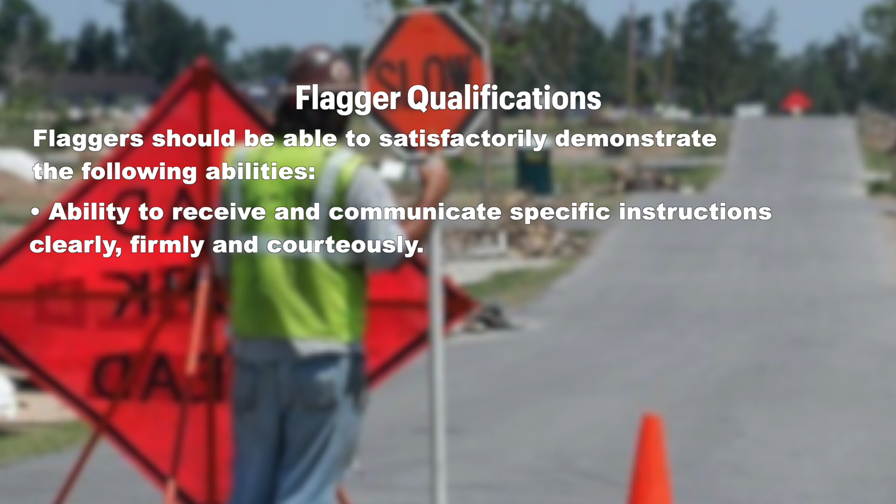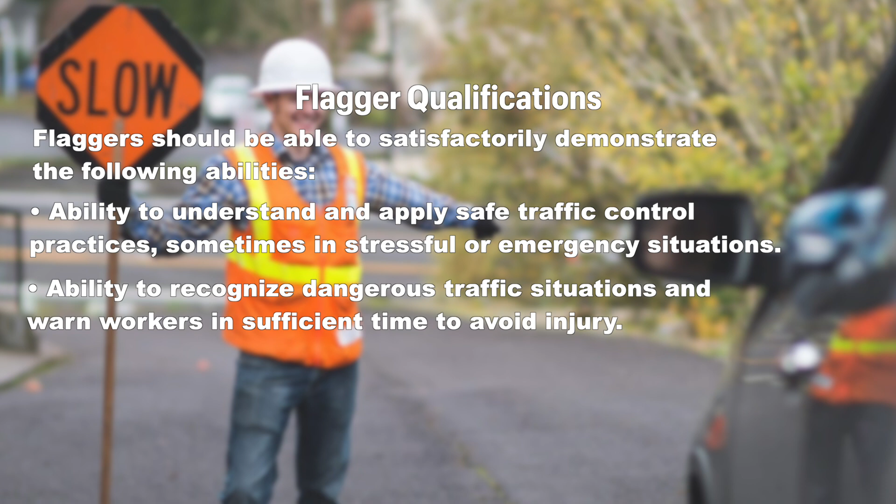Ability to receive and communicate specific instructions clearly, firmly and courteously. Ability to move and maneuver quickly to avoid danger from errant vehicles. Ability to control signaling devices, such as paddles and flags, to provide clear and positive guidance to drivers approaching a temporary traffic control zone in frequently changing situations. Ability to understand and apply safe traffic control practices, sometimes in stressful or emergency situations. Ability to recognize dangerous traffic situations and warn workers in sufficient time to avoid injury.

Flagging operations. The stop or slow paddle should be the primary and preferred hand signaling device because it gives road users more positive guidance than red flags. The use of flags should be limited to emergency situations.

Internal Traffic Control Plan (ITCP). The purpose of an ITCP is to develop strategies to control the flow of construction workers, vehicles and equipment inside the work zone. Operators should get out of their vehicles and walk to the rear to look for people, objects, and/or confirm clearances. Warn nearby workers who might be in the way. Nearby on-foot workers must pay close attention to the equipment and watch it come to a complete stop.

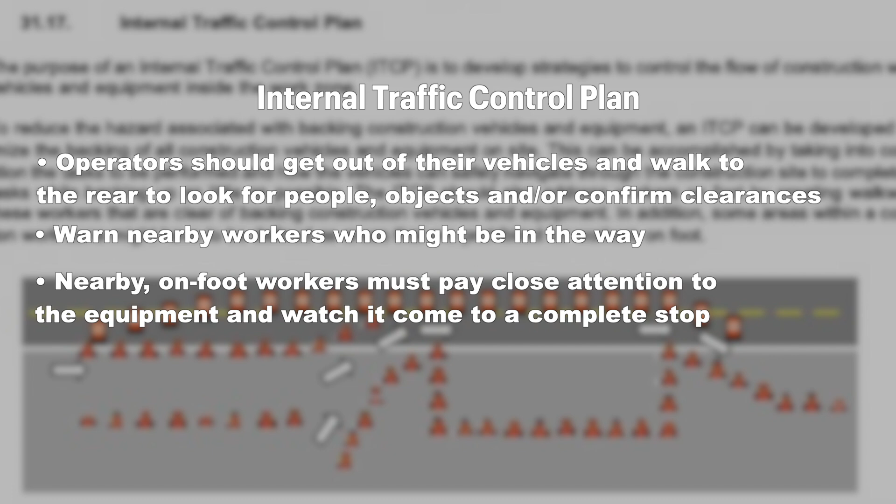Safety notes. Different aspects of the ITCP may be identified and developed during the various construction phases of a project. However, the general principles for a milling and/or paving ITCP are established in this document.

Pedestrian workers: Avoid walking or standing in the travelway of any vehicle or equipment. Stop the operation if you observe any pedestrian in the travelway of any vehicle or equipment. Do not be in front of the paver unless another worker is acting as a spotter. Crossing between the front of the paver and a backing dump truck is prohibited.

Minimize time spent on foot working adjacent to live traffic whenever possible. Take breaks as far away from live traffic and moving equipment as possible. Walk in a way that deliberately maximizes distance from both live traffic and moving equipment. Do not use a cell phone or other electronic device when crossing traffic routes or engaged in safety-sensitive work.

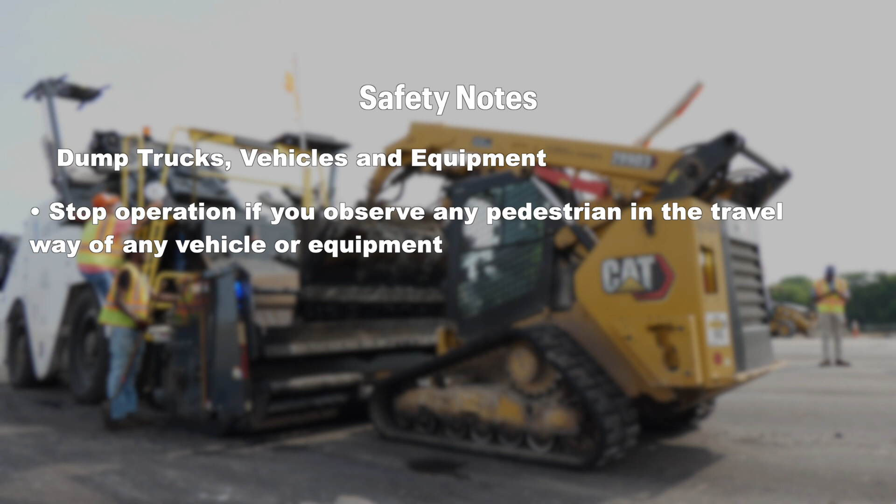Dump trucks, vehicles and equipment: Establish and maintain eye contact with on-foot personnel while you are reversing. Stop reversing if you do not have eye contact. All dump trucks must be equipped with working backup alarms. Shifting into neutral or any action that deactivates the backup alarm during backing should be limited to only when absolutely necessary. Stop operation if you observe any pedestrian in the travelway of any vehicle or equipment.

Dump truck drivers should stay in their truck, alert and ready to respond to instructions. Access the work zone by coming up from behind the operation in an adjacent lane and turning in between the cones at the appropriate point. When entering the work zone, ensure that your path is clear of workers and equipment. When exiting the work zone, use extreme care to ensure the vehicle can be safely merged.

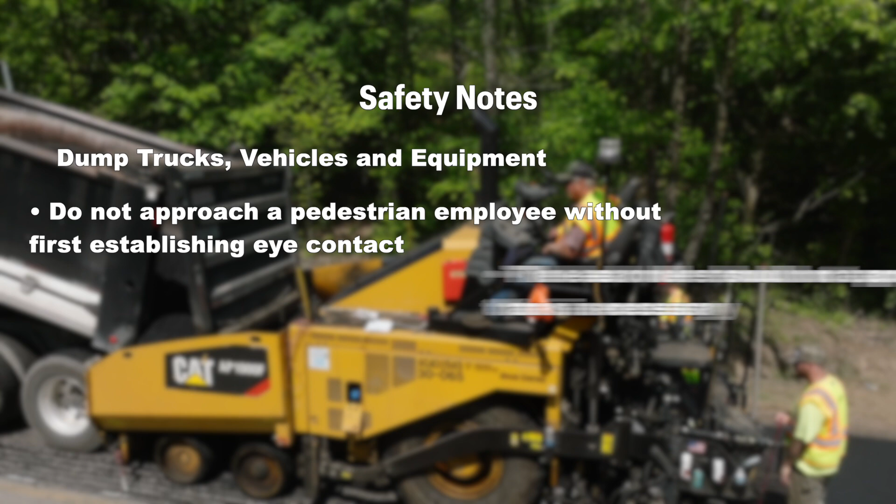Wear all required PPE when exiting a vehicle for any reason. Dismount equipment on the side away from live traffic whenever possible. Do not approach a pedestrian employee without first establishing eye contact. The lead roller should not approach the paver closer than is necessary. Do not use cell phones while operating vehicles or equipment. Trucks and equipment must be reduced to a safe operating speed while in work zones.

Motor vehicle safety. The majority of fatalities that occur in road construction work zones in the United States involve a worker being struck by a piece of construction equipment or other vehicle. A worker in this industry is just as likely to be struck by a piece of construction equipment inside the work zone as by passing traffic. Always follow these safety guidelines.

All equipment left unattended at night must have appropriate lights or reflectors, or barricades equipped with appropriate lights or reflectors, to identify the location of the equipment. All vehicles with cabs must have windshield wipers and operable defogging or defrosting devices. All vehicles must have headlights and brake lights in operable condition. All vehicles must have audible horns.

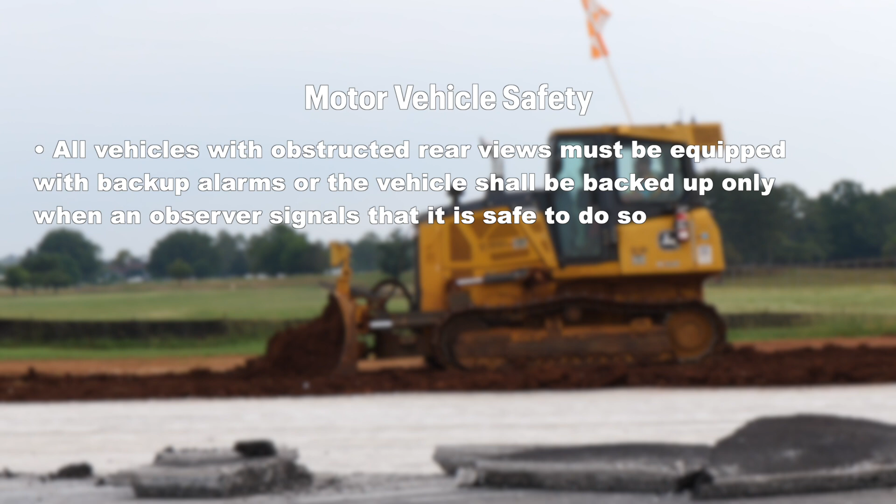All vehicles with obstructed rear views must be equipped with backup alarms, or the vehicle shall be backed up only when an observer signals that it is safe to do so. All cab glass must be safety glass, or equivalent, that introduces no visible distortion affecting the safe operation of any machine. Vehicles used to transport employees must have as many seats as there are people, and vehicle occupants must wear seatbelts. Operators of excavators and backhoes must wear their seatbelts when seated in the normal seating arrangement for tractor operation.

Methods of dealing with hostile drivers: Walk away. Do not argue, be courteous but firm. Record a description of the car, driver and license plate. Notify your supervisor. Warn fellow workers.